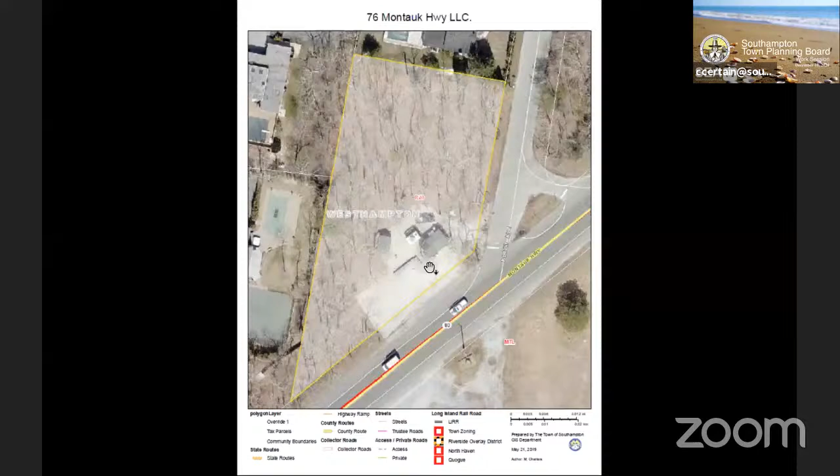This is on for completeness. It's 76 Montauk Highway. The board saw this the first time for completeness back in August on the 13th. It was deemed incomplete - basically it didn't comply with the adopted pre-submission conference report. If you can see here, it's not a great copy. I don't know what's going on with the scanner downstairs, but the applicant has revised their plans.

They're showing some angled parking here. Janice and myself had the opportunity to meet with the owner of the property and Rob Marcinsick, and they're going to do some temporary planters here to control the flow of traffic - someone will enter here and go out here, or vice versa, come around and come out, just so we can close up this curb cut a little bit. But they've submitted everything they need to.

This is the existing farm stand. It's pretty small, what they're doing in the nature of the work - just a 195 square foot expansion. It's going to match what's there, so I'm recommending this is deemed complete. We did SEQRA on this, if you recall, back in 2017, adopted a pretty hefty conditioned negative declaration which limited what was allowed on the site and the hours of operation. So I'm recommending we deem this complete.

There's been hearings for this at the ZBA and for the pre-submission. The public has never come. I don't really see the need for an additional public hearing, so I'm recommending that gets waived with a 30-day written comment period.

Can you go back to the survey for a second? Sure. Do you have encroachment - is the property going off the property line? Not that I can see. Yeah, it's right there, where your hand is. Right here, this is the property line here. Yeah, these are the curb cuts.

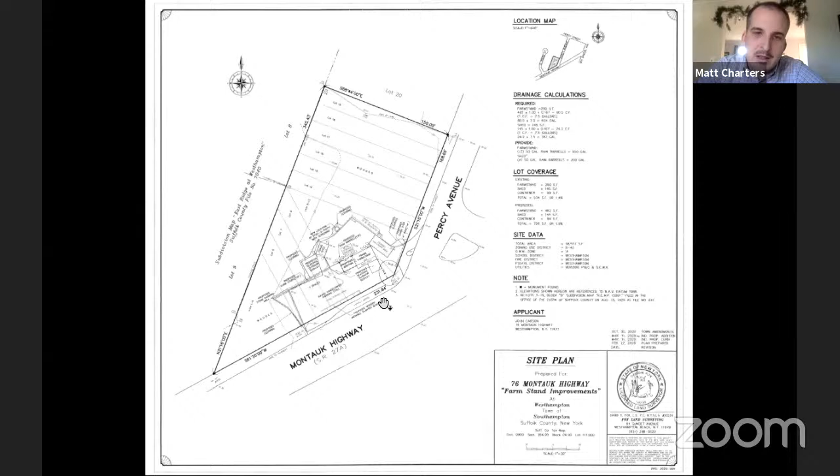They just kind of show where the curb cut is. It's within the right of way. If they need to do any additional work in the right of way, they'll obviously have to get permits. In this case, I believe it's from the state, this section of the highway. I saw the dock line for the property line and it seems to be the edge of the pavement.

The movable planters are an interesting solution.

Does Rob Marcinsick need to say anything here? You're muted, Rob. Can you tell him he's muted, Charles? He's not paying any attention to me. I think his microphone's just not working, his volume is not up. Turn your volume up.

Me and Rob had a conversation there. I think he's good, I'll translate, everything's okay, so we're going to deem it complete.

We're going to waive the public hearing and have a 30-day written comment period. Have a motion? Motion by Dennis, second by Phil. All in favor? Aye. Opposed, abstentions, 7 in favor. Thanks, Rob.

We're moving on to number 3, Hamlet of Bridgehampton, the Farrell Building, 2331 Montauk. Anthony, that's you. We did a pre-submission conference on this. This is Montauk Highway, this is the site. There was an existing structure that might have been removed. This is the proposed Farrell office building in the HO zoning district, next to the existing Farrell building. They will be utilizing the existing access and coming back here.

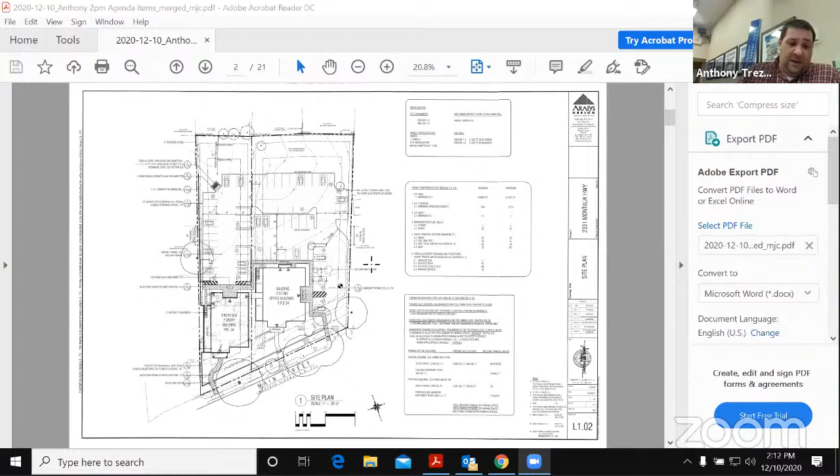The elevations are hard to read here, but they could use a little work, some more details and colors. I had also sent you the checklist, which I don't have up here. The applicant's missing a number of items, which I advised them of. The town engineer also did a review and is missing items, so I forwarded that to the applicant, and I'm recommending we deem the application incomplete until we get new maps. Is anyone here representing this?

I believe Bailey Larkin was supposed to be here. Charles, is Bailey Larkin there? I am looking. Yes. I'm sorry, I should have said that first.

Hi, Bailey Larkin with Bennett and Reed, offices at 212 Windmill Lane in Southampton. We did receive the comments from Anthony and the engineering staff, and Aries Design is working on addressing all those comments, so we had anticipated it was going to be a decision of this board that it was incomplete.

Can I have a motion to deem this incomplete? Motion by Gloria, second by Dennis. All in favor? Aye. Opposed, abstentions, 7 in favor.

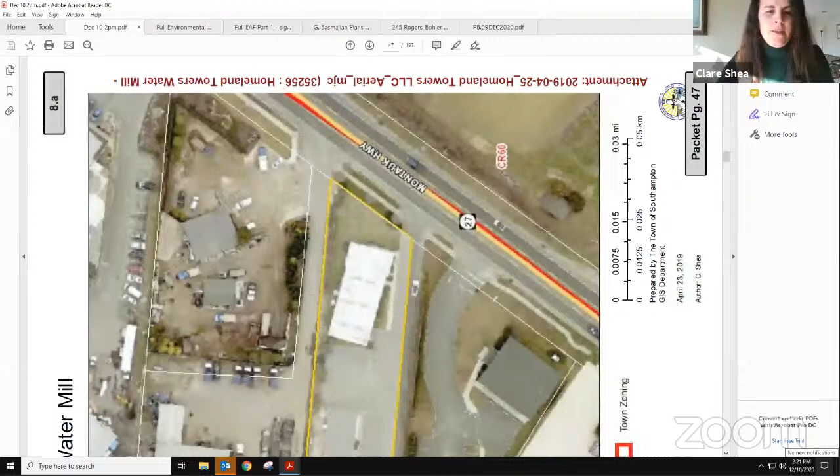So this is the cell tower in the rear of the Ethan Allen property in Water Mill. This has been subject to an application. The site plan hearing happens, there's some comments, and this is the aerial.

Since the hearing, the applicant has actually amended the application to provide an additional plan that relocated the structure back to a 100 foot setback from the neighboring property, so it meets that setback entirely in the rear. So you can see it used to be more centered here, and now it's located to meet the 100 foot from this property line. So that standard is now being met.

Can I just ask a question before we get into the report? What is the disposition, Robert, of those cars? Disposition of those cars, they either need to go or the property owner needs to make the necessary application and the board needs to approve it. And quite frankly, if we receive an approval with the condition that our building permit will be held up on those cars being on the property, then we will do what we have to do with our lease rights to apply whatever pressure we can apply.

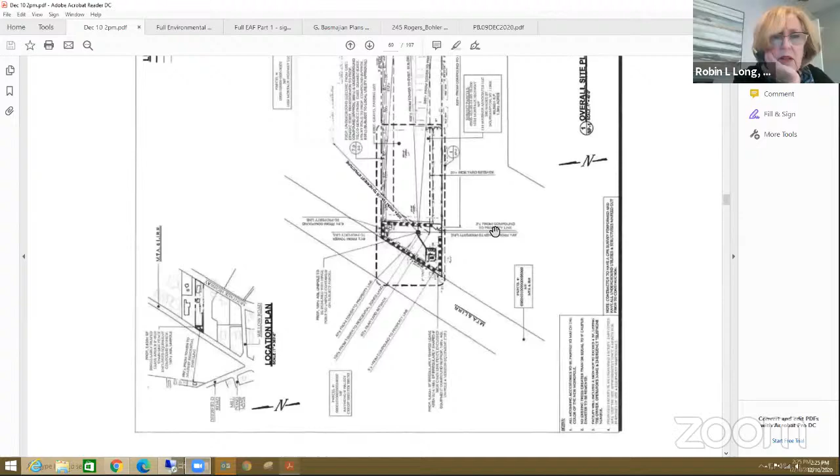Did we ever straighten out how many uses are on this property? Yeah, so this has been determined to be an accessory use. That was a determination that the building inspector has now made, and it's referenced in the report now. Accessory to which one of the other two uses? I think the contractor use on the property.

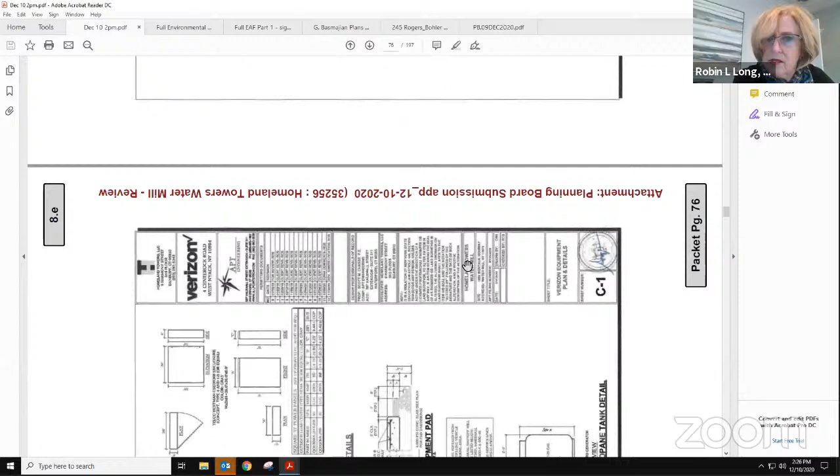Because it would be important to determine the cars, to see who is claiming that usage. Who is leaving the cars on the property - is it the contractor? No, neither, it's a car dealership elsewhere, and they're just parking there. Who's granting the permission for the car dealership elsewhere to leave the cars there?

The owner, presumably the property owner. Which is what Mr. Gaudioso is saying - once he's going to have that conversation with the property owner pursuant to his lease, and his lease is with the property owner. Okay, I need my approval from this board to have a little more leverage, quite frankly.

So there's a property owner who's renting to the two stores and possibly renting to a third party who's storing the cars. I'm just trying to understand. Correct, yeah, that's my understanding.

And your lease is with the property owner making this - does the accessory use tie to one of the two stores' lease? I'm just asking for the mechanism. To the use that's on the property, not necessarily to the lease, but I guess you could, by result of that, say the word lease, but it's based on the use.

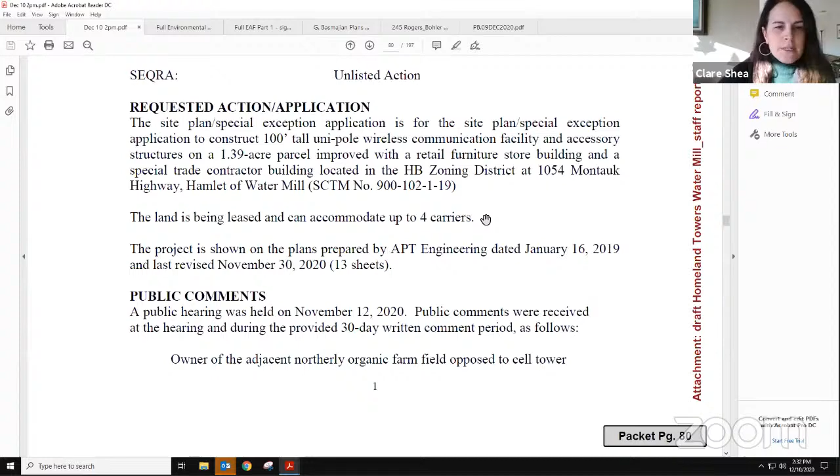It's a 100-foot tall unipole in the rear of the building, and it can accommodate up to 4 carriers. It's going to be a lease. Internal tenants, yeah, exactly.

Public hearing November 12th, 30-day written comment period. During the hearing there were some comments. The owner of the adjacent northerly organic farm is opposed to the cell tower. The organic farm field is zoned residential and they wish to build a house there in the future.

CAC concerns are cited in the 2019 letter. The 85 to 100-foot monopole cannot be incorporated into the streetscape and is highly visible. Additional carriers will require the 100-foot height. The data survey is flawed; the use is industrial.

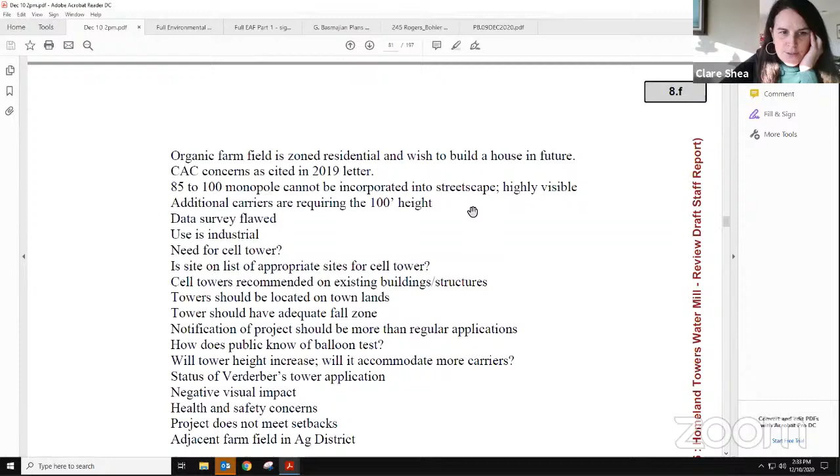Is there a need for a cell tower? Is the site on the list of appropriate sites for cell towers? Cell towers are recommended on existing buildings and structures. Towers should be located on town lands. Towers should have an adequate fall zone. Notification of projects should be more than for regular applications.

How does the public know of the balloon test? Will the tower height increase? Will it accommodate more carriers? What is the status of the Verderber's tower application? There's negative visual impact, health and safety concerns. The project does not meet setbacks, and there's an adjacent farm field in the ag district.

The applicant provided a response that I forwarded to you, I think mid last week, so I just wanted to make sure you had that. The project is classified as an unlisted action, and the board issued a negative declaration on October 8th.

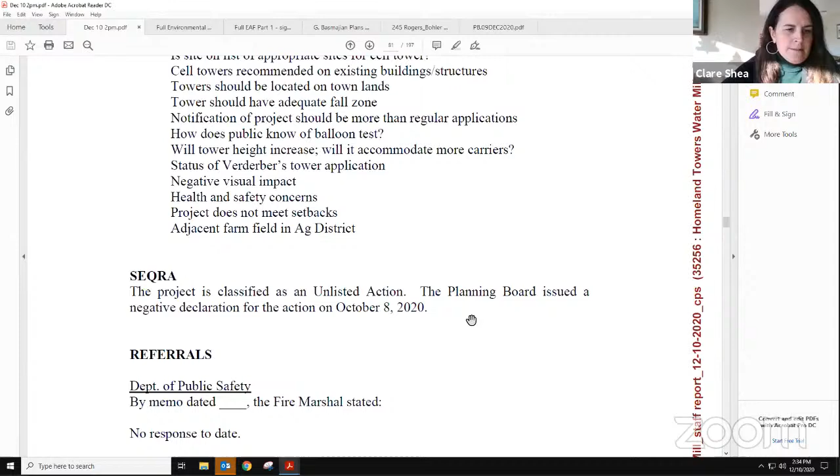The fire marshal comments - I'll add these in, I just got them a couple minutes ago, so I'll put them in there. Southampton Fire District had no response.

And here's the CAC comment, I'll read it into the record. The Watermill CAC presented a number of questions and concerns regarding this proposal during the pre-submission conference. While we appreciate the applicant's attempt to address the issues we raised, the same problems exist. Therefore, the CAC would like to submit our letter from June 2019, and we'd like to make a few additional comments for the record.

While the height of the tower has been reduced, it still doesn't meet the setback requirements for this type of application. During the pre-submission conference, the applicant posited that the board should grant them relief since the fall zone was adjacent to an open farm field. They continue to make this argument. This farm field is located in an agricultural overlay district, which is an area to be avoided according to the town's wireless communication plan.

It is organically farmed by the Halsey family and is also zoned residential. At some point in time, the property owner may decide they want to build a house for their children or grandchildren, and perhaps they may want to or need to sell the property. The installation of a giant cell tower will basically render this property worthless.

No one in this community would ever willingly buy a house, build a house, or raise their family under the shadow of a cell tower. It is also rather disingenuous for the applicant to say that granting them relief from the setback requirements would be vindicated by the fact that the land was never developed residentially, as if the setback requirements for the homeowner would somehow make up the difference.

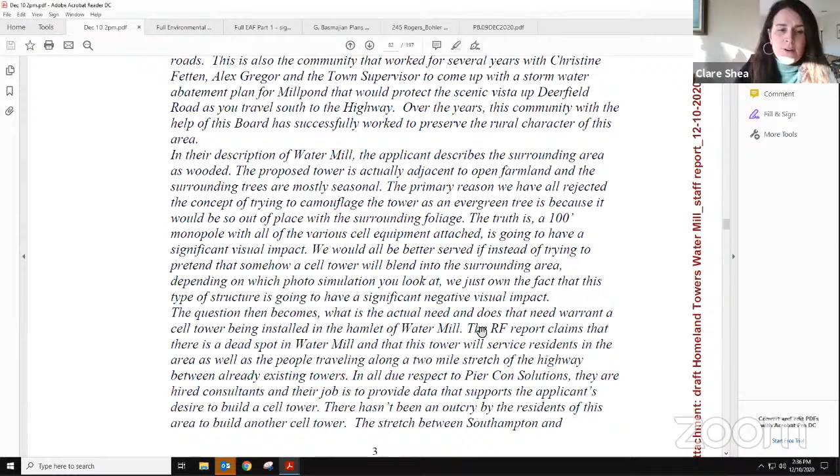The truth is, a 100-foot monopole with all the various cell equipment attached is going to have a significant visual impact. We would all be better served if, instead of trying to pretend that somehow our cell tower would blend into the surrounding areas, depending on which photo simulation we look at, we just own the fact that this type of structure is going to have a significant negative visual impact.

The question then becomes, what is the actual need, and does it warrant a cell tower being installed in the hamlet of Water Mill? The RF report claims there's a dead spot in Water Mill, and the tower will service residents in the area as well as people traveling along the 2-mile stretch of highway between already existing towers. With all due respect, Pier Con Solutions hired consultants, and their job is to provide data that supports the applicant's desire to build a cell tower.

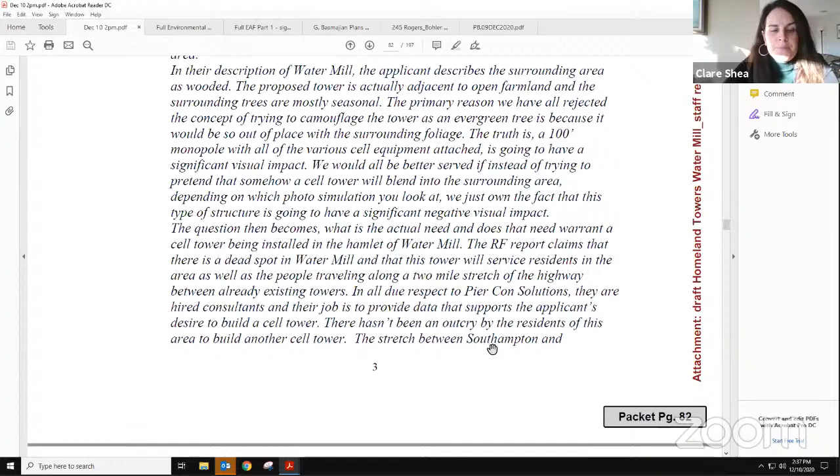There hasn't been an outcry by residents in the area to build another cell tower. The stretch between Southampton and Bridgehampton is not an area known for dropped cell phone calls. All of us who live here know the area well enough to confirm that while there are definitely a list of dead zones in our community, they certainly don't include this section of Watermill.

Page 23 of the report, the applicant concludes that there will be no significant effects from this project. However, without a proven need, combined with the fact that this proposal does not meet the basic setback requirements, and there will be a proven negative effect on adjacent property values, the Watermill CAC respectfully asks the board to consider our comments and deny this application.

Southampton Town Engineer, as of October 20th, had statements regarding the trench detail and the pre-construction meeting, and recommended approval. The Suffolk County Department of Economic Development and Planning said it was a local determination.

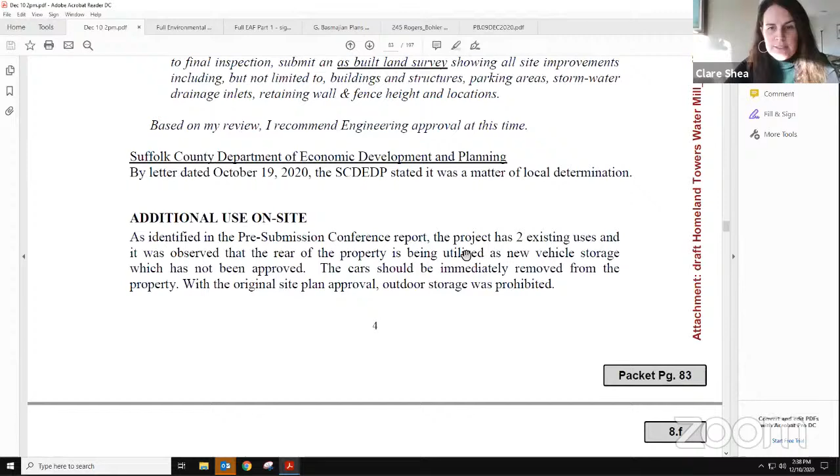And this is my language about the additional uses on the site. There'll be a condition that they be removed prior to signature of the plans. So I'll have that language in the decision if the board's comfortable with that. And then here's the language regarding the use, and then I'll reference Dennis's exact memo up above.

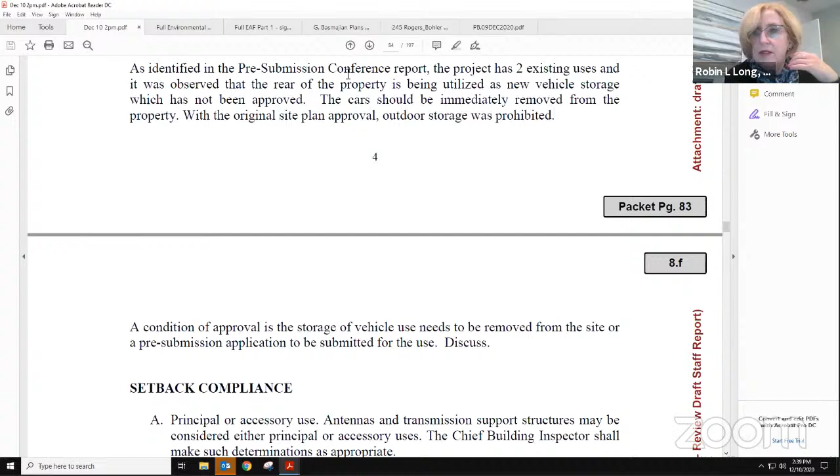Clare, can I just back up to that verbiage on the cars? Is there any other debris or trucks, or anything else that they have on that site besides the vehicles in that area? Do you want to look at the aerial? Because they're being very specific that storage of vehicle use needs to be removed, the vehicles need to be removed. I'm just concerned that when we get very specific, we've covered everything. I don't know what else kind of junk they've got there, and it might help the applicant also.

Is there anything else there that needs to be removed too? It looks like some of the vehicles are larger than cars, so maybe we need to say vehicles. Matthew, did you see anything there? Yes, is it truck containers?

The other uses, where Clare's cursor is now, I believe those are vehicles associated with the special trade contractor use that's permitted there. Have we formalized that parking back there for the special trade contractor? There's a site plan for that. It was related to when Ethan Allen came in, so we reviewed the entire site at that time. So there's a site plan that allowed them to have this associated with their contractor use. But yeah, we can be very specific, Robin.

I'm looking at the verbiage and I'm a little concerned that people who don't really want to follow the law will look at that verbiage and give us a hard time. We want that all cleared out, and I think the applicant wants it all cleared out also. So whether it's being used for storage or whatever, any vehicles back there that aren't the contractor's and aren't legal parking shouldn't be there. We can say any vehicles not associated with the permitted uses on the parcel.

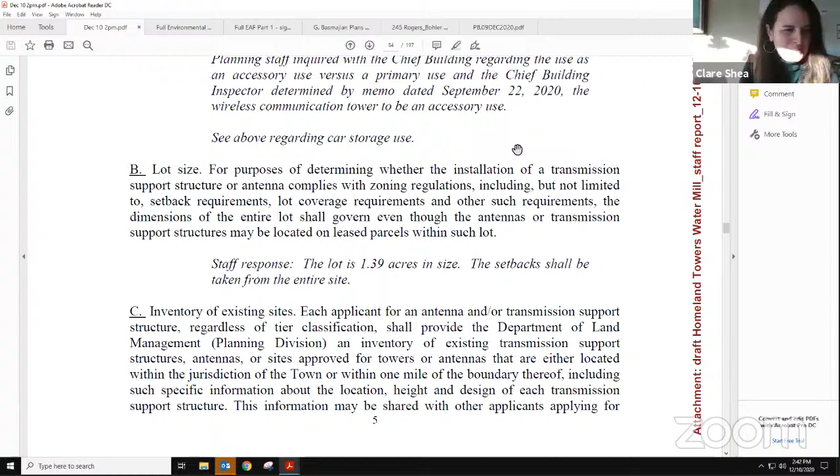Okay, I'm just going to go through the standards real quick, and I'll skip anything you want, since there are a lot of pages to this. So the lot size meets the requirements. They provided the inventory, building permit required, had to follow the building code, signage requirements.

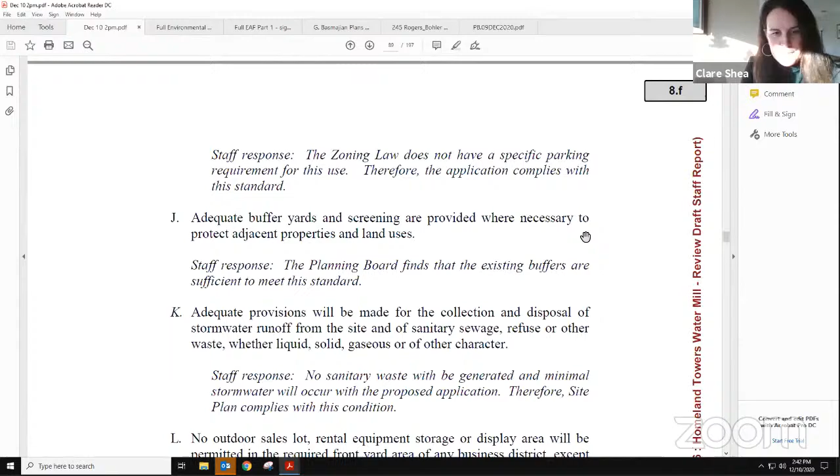And then here's the special exception criteria. These are the general ones, I'm just going to skip these. It's more appropriate to have the specific ones that have the setbacks and such. So here they are.

There's a pre-submission conference process. This is the standards for the 100-foot tower proposed. They are, pursuant to current federal regulations, eligible for 2 10-foot extensions. The applicant—

There's no proposal to extend it at this time. But that's based on approval by the planning board, right? No, at that point—as of right? I mean, I don't think it's as of right. I think it is, but they would come to us, but it'd have to be granted at the end of the day. It has to meet certain conditions, though.

Yes, there's a lot of standards that have to be met, but I think we should put what federal regulation it is, if it has a number. It would be—I can cite it. Yeah, I just wanted it in here. It's just kind of standard. I've been carrying this over, so everybody's aware of it.

Didn't we have that where somebody did 120 and we didn't know how it got from 100 to 120, but they were allowed to go up? I think that was 120. Yeah, that was the one in the LI-40 zone, in Eastport. That's why I like that language, so that we're all on notice about that. Exactly, they came back and got your approval for it. It's just, unfortunately, part of the federal regulations for it.

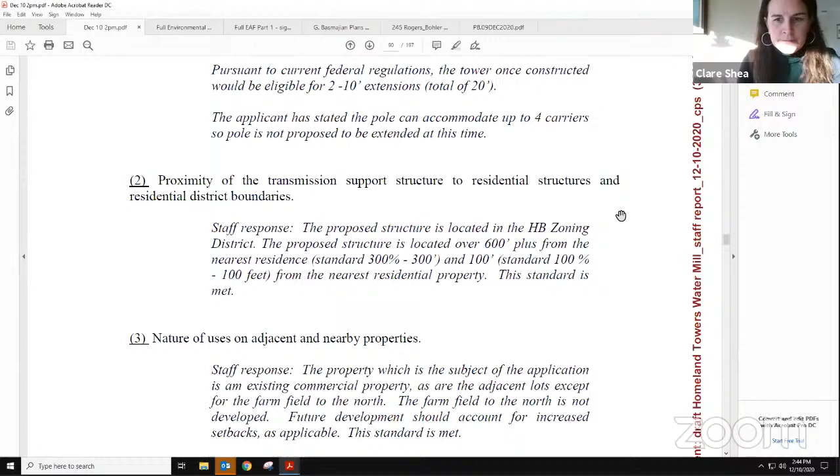So this is the setback. This is 100% from the nearest—this is 300% from the nearest residence, and it's over 600 feet. So it meets the standard for this.

And so that's the change that the CAC was in opposition to. Actually, no, this has always been conformance—they have always been more than 600 feet from the nearest residence. There's a bunch of standards here to be met. What's been changed is with the fall zone. What the CAC did not like was that the fall zone is 100% from a residential property, which is coming up. So they moved it to accommodate the fall zone. Yes, they have.

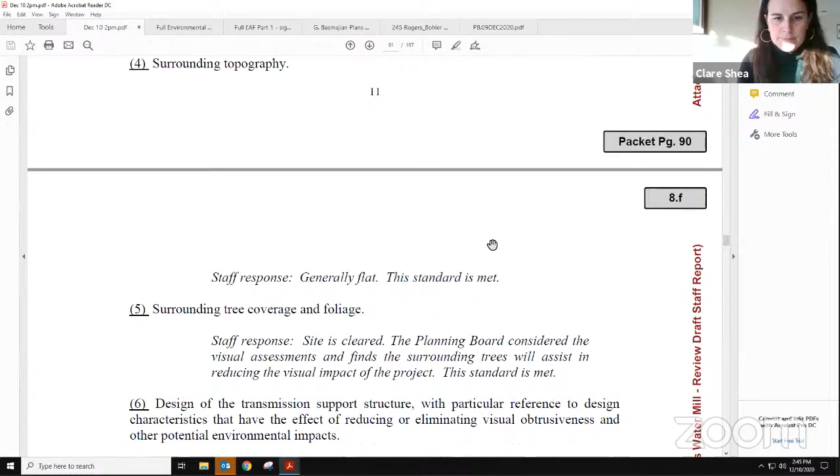Okay, generally flat, so the surrounding tree coverage—you had reviewed this as part of the visual impact under SEQRA. The color will be gray, silver, or blue, and that'll meet that. Egress, ingress will not change. We had reviewed the alternative transmission structures existing. Standard is met.

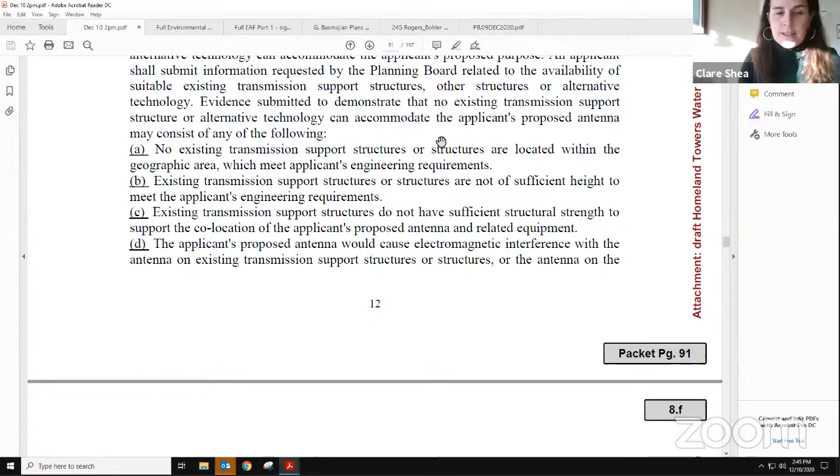This is related to the need for the alternative for the technology. That was the RF report that was submitted and you reviewed at time of SEQRA.

This is the visual compatibility. Again, this is about the gray color for the structure, so it blends as much as possible. Site design—this is the FAA. The standard is met. Landscaping.

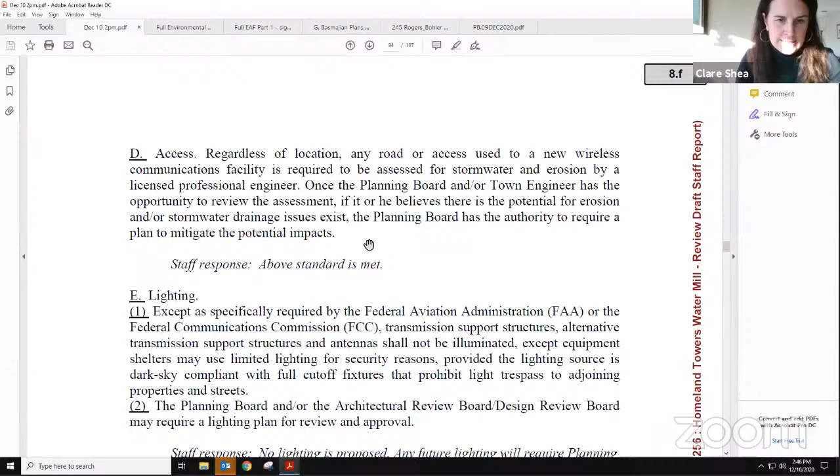Talk about this—the applicant has proposed, and I can show you that on the site plan, a series of evergreens, arborvitaes around the perimeter of the property, which will help screen the equipment and the fencing, and arborvitaes grow large. So there'll be a landscape bond related to this. This is the fencing requirement, and they'll have to meet that. Access is existing, so it'll be met. There's no lighting proposed that I know of, but any future lighting will be subject to planning board review.

Signage—may I stop you for just a second on the landscaping? Sure. It would be around the fence that's going to encompass the equipment, not around the total parcel, which has other uses.

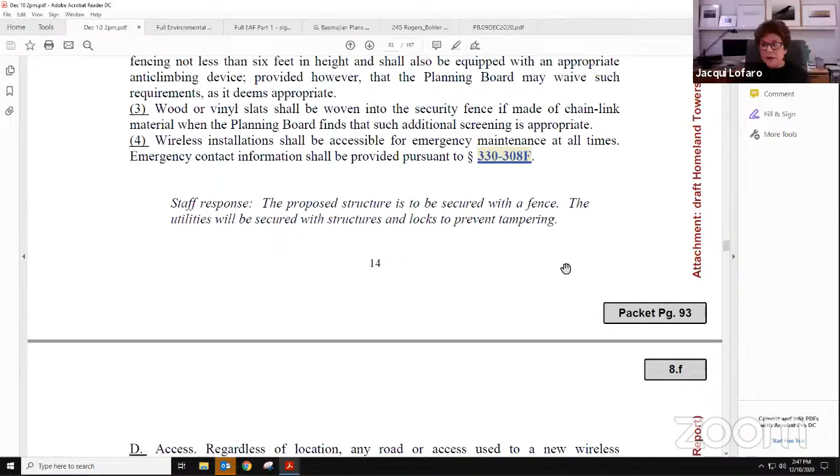It's only around the leased area, yes. Do you have a landscape plan to show? Yeah, I have to go back to the plan, I have to jump around here. Finish your report first and then we'll go back to the plan, Clare. Okay, we'll do that.

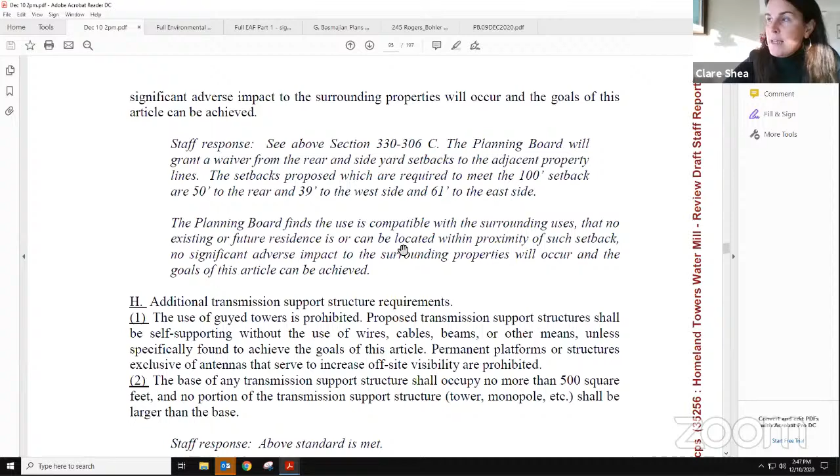Access, lighting, signage, setbacks. Here we go. So there are two standards: the 100-foot setback to the rear to the residential properties is being met. The other setbacks, from the property lines, are variances you are granting due to the fact that the properties to the east and west are commercial in nature, so you've granted relief from the 100% setback.

These are the setbacks to the single family residence. That's 300%, that's at 600. And this is the vacant unplatted residential, so you can see it's 100 feet or 100%, which is the 100-foot that's being met now from their property. And this is the equipment base. This is all consistent, and that's the end.

So I'll go back to the plan. I think it's at 69.

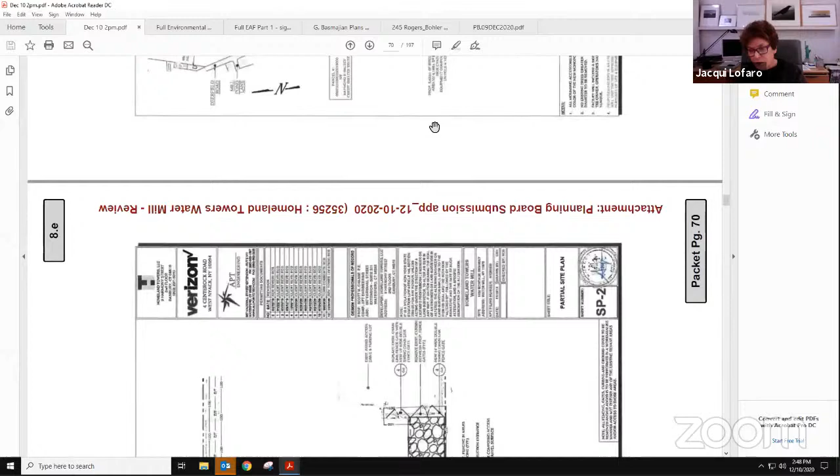So Robert, with this tower, you've got 2 miles from Watermill, then it goes to the Bridgehampton cell tower, and the Bridgehampton cell tower picks up and goes forward from there. I think one of these days what we'd like to see is an overall master wireless plan.

Maybe that has to come out of the planning department to see where gaps are now. I agree. If you look at the report PeerCon did, we didn't do the whole town, but we did this whole area, even heading up to Sag Harbor, and that would be a really good start. A lot of the maps in the master plan now are from prior technologies and prior usages. After COVID the usage has changed so significantly on the East End that the coverage is different. I think the first presentation we heard today about the while-you-wait technology, the fact that we're doing these meetings on Zoom...

I just think going forward, things are going to be different, and in some ways for the better, but that impacts the need for wireless service. I know you asked the question before about the service in the parking lot. We'd be happy to meet with staff and show them what we have, and irrespective of this application, we'd be happy to be cooperative like that and try to provide some data.

Thank you, because that would be good for everybody. Yeah, that would help everybody. We need, just the way we do for trails, to do this with the cell towers and see where coverage is. It evolves, but there's nothing wrong with having the current data and understanding the current situation and where you expect it to go. That's smart planning, quite frankly. I agree, and we have the information, it's just different applications, so it's a matter of putting it together.

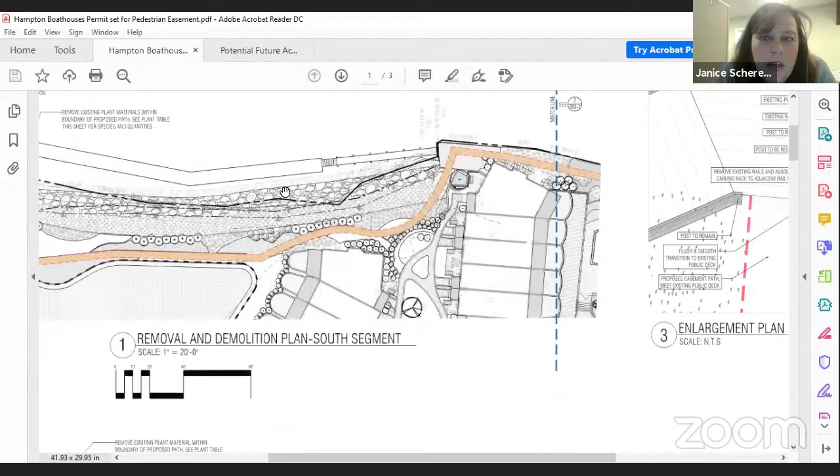Unfortunately, the way the easement is written and agreed was a springing easement predicated on getting the other side for public access. So this shows how it would be connected. Kristen also gave us a short video, about five minutes, of walking that path, which might be useful to see.

Oh wait, okay, can you see this? No. So that's the fishing pier component. I'm not seeing it, we don't see it. It's not up yet, Janice. Hold on, that's weird, what's going on, Mike? I gotta see that. What are they seeing? Okay, can you see that now? Yep, let me start over.

Sorry, so this starts at the fishing pier overlook, closer to Montauk Highway, just to orient you. I'll push play. So this part of the construction has been completed, related to the parking lot, and someone can access this and fish into the canal.

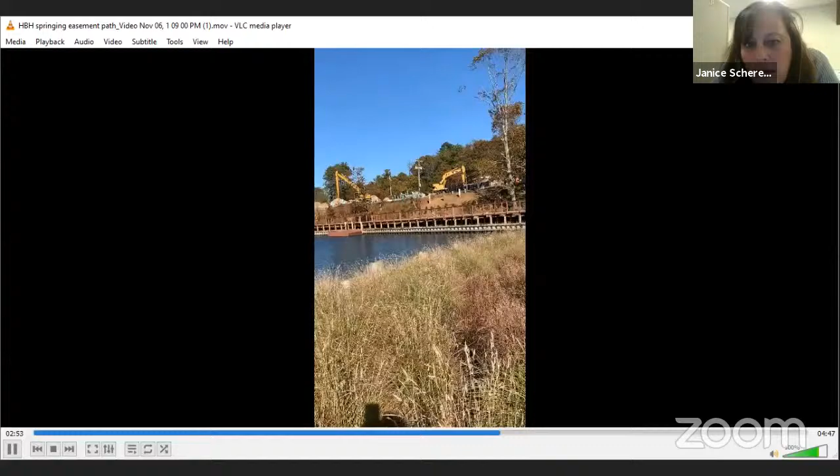And like you said, adding a railing at the bulkhead. Seems like a minor detail, but could we throw a life preserver ring on the rail maybe? Well, when I was there doing an inspection, I was concerned about this lower bulkhead part because it's all vegetated and looked difficult to navigate. Above that is the pool area, right there to the right.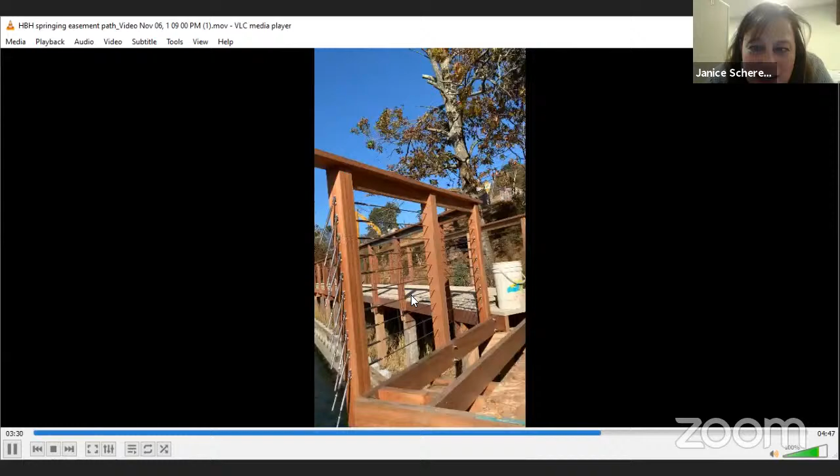And then they would go up, this is that new dock you had. It was a floating dock, and John Zuccarelli was very worried someone might fall, so they redid it and the height, remember. I think that came out really well, actually. The whole thing would be such a wonderful community benefit when it's finished, if we can get this done.

And how much parking access is there? There are 5 parking spots, end right? So this was just what you saw, that existing deck, walking along this path all the way around the pool area. So it was that path you just saw her walking on. And do you find that this plan shows that in enough detail, and then you can approve this plan, is really the question. Janice, my usual question that comes up at this point, the MTA hookup, where is that?

There's been no activity on the part of the applicant to secure any easements from anyone. And we've tried multiple times and have not been successful.

Wasn't this part of this, that there would be the hookup for it to go right into the other park? Yes, through the MTA property. I'm sorry, Robin, can you repeat that? I'm sorry, the MTA property.

So it's a springing easement, in that it's not a public access easement until there's somewhere to get to. But they're sort of not building it yet either, apparently. Well, they've agreed to do some mulch path here, at this point.

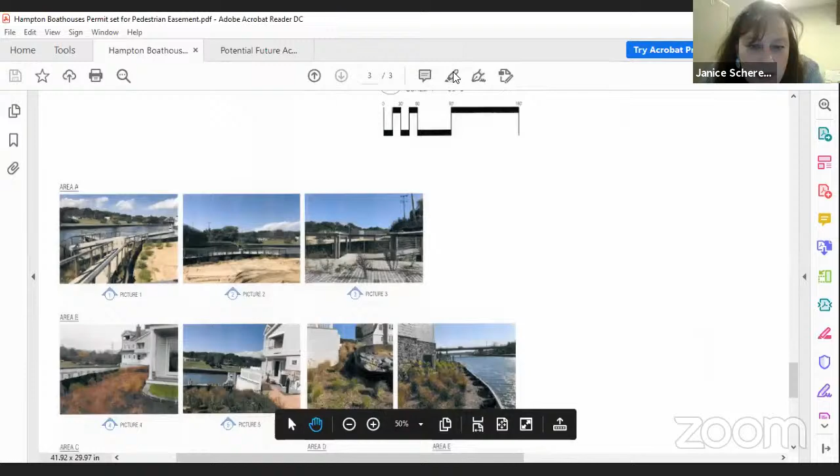The easement language, if I can go to that, actually, hang on a second. Sorry, just give me a second. Or not, I guess I don't have that. The easement language indicates that it may be that the municipality would, do you see this now? I'm sorry. Am I? Right. Having technical problems here.

Screen, share screen. It's 2020. We're having problems. Here it is. Okay, here we go. Seeing this?

Yep. So number 1, they shall construct and create a public access path. Grantee may construct the path in the event that same has not been constructed by grantor after notice and reasonable time, meaning the town would be responsible.

I just want to make sure that we don't need a performance bond, is my basic point. Well, if the town constructs it, wouldn't the cost be assessed back to the HOA at that point?

Well, it would be great to get this done before an HOA is established. It would be transferred to the HOA. I mean, it doesn't say that.

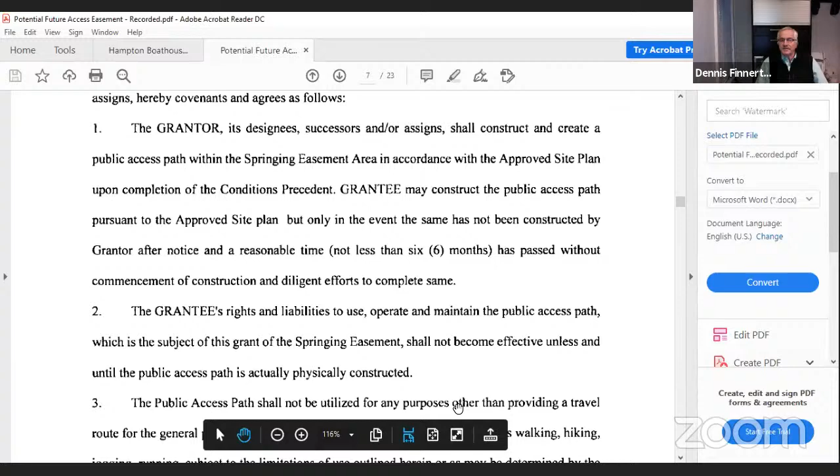We should have some sort of document, Janice, that details the scope of work, the path. Just something to formalize it, so all parties are in agreement of what would be constructed. And then, if the grantor does not construct it, I would say the municipality would construct it and the cost be assessed back to the HOA, or back to the grantor. Is that contained in the agreement or the local law?

No, it just provides for the fact that the public access is important. So my basic point is just that we're happy. I think that the plan captures what we want.

You're right, Dennis, I agree with you that we do need a little more closer scope of work and understand the cost associated, and just basically, do we need some kind of instrument such as a performance bond, or are we just going to assess that back to an HOA if it falls on us to construct it?

I just want to lay it all out there so we're all understanding what's happening here, which is it doesn't look like it's being constructed now. It may be this mulch path, but the rest of it is not. It's certainly not available to the public, even though it could be made available to the people who live there if it were constructed now.

But as far as I can tell, it's not being proposed to be constructed anytime soon. So there was no start date indicated here and finish date?

Well, the start date is when the owner receives notice that the town has achieved access to the site on either end. And that's contained in the, right, so that's the start date. So at one end it's completed and at the other end it's completed, right? So it's the middle pathway that has to be completed.

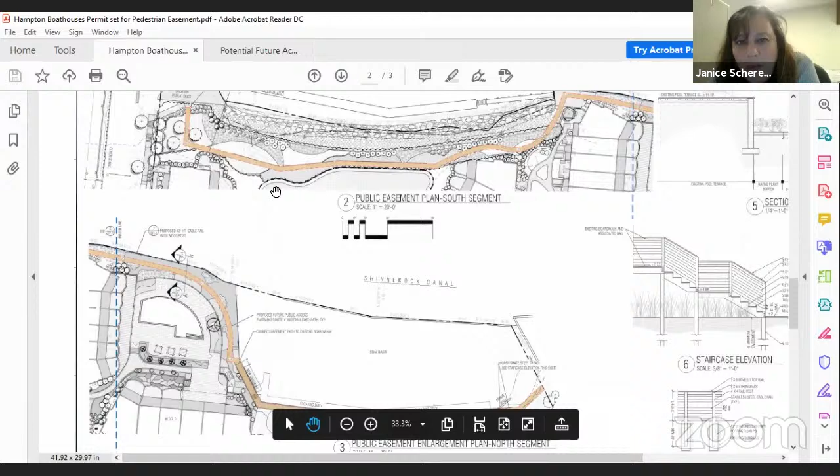Well, first you have to complete the ends, the north end and the south end. Once we get notice of that, they have the obligation to complete. What is the definition of completion pursuant to the site plan? Well, this would be the plan that you approve that equals complete.

So the question is, is any document, form and substance of that site plan acceptable to the board in terms of what you're getting if and when it does happen? Isn't the question when it happens? Don't we want this to proceed?

We would have to get notice that access has been granted on the north side from the MTA and the south side from Suffolk County, and then these improvements or modifications would be made. That's when this starts. And then this plan identifies the materials, the improvements, the modifications, the changes that would need to be made.

So that's clear, but can I ask you, have you proceeded with securing the MTA agreement and the Suffolk County agreement? There have been conversations, and what we've been told is that they are not okay granting public access underneath the Montauk Highway overpass bridge. But yes, we have done what we're able to facilitate those conversations.

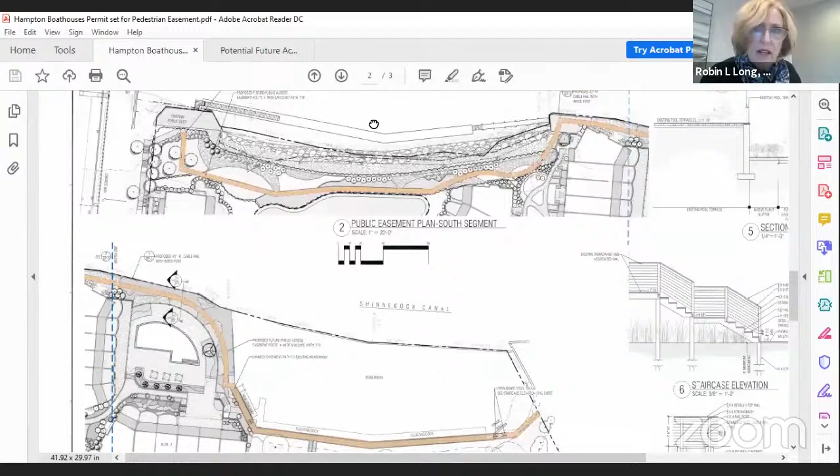Are you saying they're not going to grant it, the MTA or the county? The county for the south side underneath the bridge, and the MTA to the north of our site. So this will never get built?

It's not that, that's the highest town board condition that the board imposed on the approval of the change of zone. This is a community benefit that will never exist unless— translation, Robin, the town cut a bad deal. No, wait, Dennis, that's not fair. It is. The town requested it in order to connect a walkway along the east side of the canal.

But if there's no connection for the walkway coming from the north to the south, then this doesn't really serve a purpose. It would serve a wonderful community amenity. People oftentimes take walks up trails and then turn around and walk back. Well, that wasn't what was agreed to with the town board at the time.

Well, hence my comment about a bad deal. I mean, that's what they asked for, that's what they got. Well, let's try to go step by step. Whose responsibility is it to secure approval from Suffolk County and from the MTA? Is it yours, the applicant, or the town?

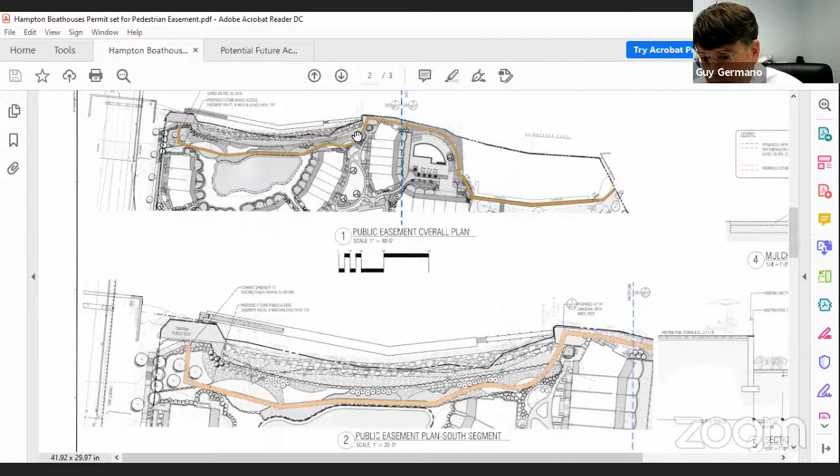There's plenty of properties where the grass goes right up to the bulkhead all the time, directly across the canal at that county park - there's no fence along the bulkhead. It's pretty typical that bulkheads aren't fenced in. The only time I've seen them fenced in is when a family has little children. I think the only thing that would trigger fencing would be public access - if you have public access, you have to have some kind of safety railing.

Right, so let's just talk about this first half. Would you be able to execute that portion of the trail, the mulch path, now? No, you'd have to take it out and do it during construction - it would all be ripped up.

Nothing is under construction right now, you saw it was just like a dirt pile. There would be no talk about safety - it wouldn't be safe for anyone to be walking south of building 3, right in the middle of an active construction site.

Can I just rewind for a second? The obligation to put in any of this path - am I correct - springs from getting permission from the county on one side and the MTA on the other side? Correct. So that path is not obligated without those two conditions being met. Is that correct? Yes.

So that means right now you're within your rights - and I'm not quite sure who was obligated to do this, because I've been asking this, Janice, I've been a broken record on this - who's responsible for getting that? So really this path will never exist. It'll exist on paper. There could be an obligation to put mulch and fencing and whatever you want, but the obligation to make that exist will never arise until there is both ends connected, or just one?

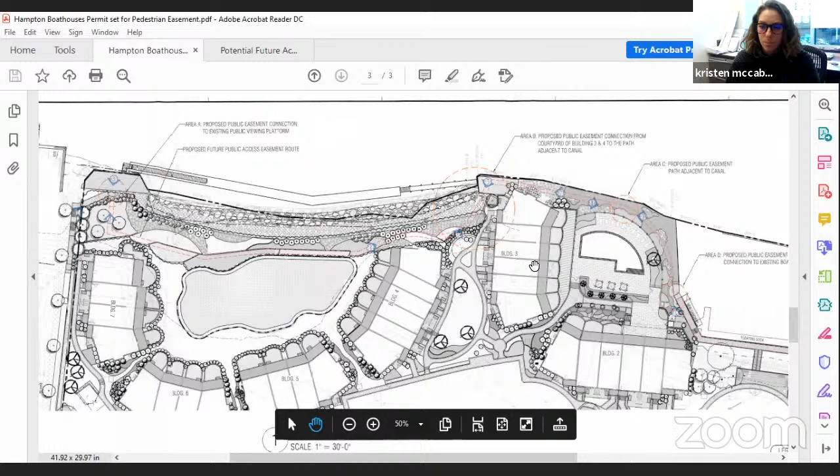Refer back to my prior comment, Robin. I won't repeat it. Dennis, we took a very strong position that this application essentially took away from the community water access. It was a very popular area before this development. So it was very integral into the approval process, this public access walkway. And here we are saying that if Robin is correct and Dennis is correct, it may never happen.

So it's a conundrum. How do we move forward with it? How do we clarify it? What only can we hope to do? Jacqui, at some point the applicants may come back to the town seeking to do a modification on either of the two sites. And at that point, the town would have leverage to say, let's put this trail in.

That goes to my point. We should have some document memorializing what we're going to do, the fencing. At least there'll be a document on hand. But I don't think we're in a position, Janice, to take a bond, because it would be really cumbersome. There would be an obligation date, it would have to be renewed. I think the PDD language speaks for itself. And we have the right, Kathleen, unless she feels otherwise, the municipality, if they didn't perform, could step in and undertake that work.

So in addition to that plan, are you satisfied at least that the plan is clear enough and we can ask the applicant to give us the scope of work? No, it's not clear enough. I mean, there's a pathway marked on the map, but it should be clearly marked, the first 200 feet are mulch, no handrails, the second 100 feet are XYZ with rails and platforms. It should be mapped out exactly like it's going to be built.

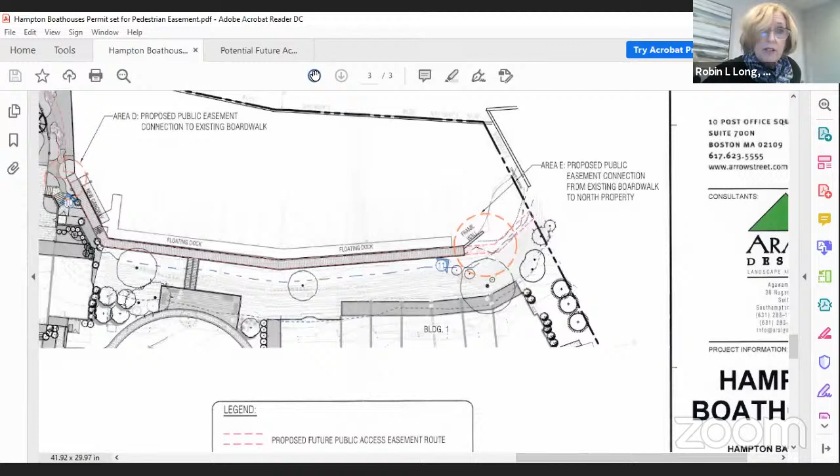I'd also like to check, I'm very concerned about people with disabilities. I was looking at one section that was on a slant or incline as you were walking. Are we saying that anybody from the public who is disabled is never going to be able to use this path? Do we have any obligation to make it ADA accessible? Robin, many of the trails on CPF land are certainly not handicapped accessible, and if you don't know what you're doing you could get hurt. That's town property. I'm asking, does the law require anything for us in doing this to make sure it's accessible to someone with disabilities?

The PDD law doesn't address it. I would say that the viewing platform is handicap accessible. Would you agree with that, Kristen? There are stairs down to it, so... yeah, there are stairs. Typically, handicap accessible trails are not required because it's almost impossible when you have topography to make them handicap accessible, and that's what you have here.

How about the viewing, the fishing area where the steps are? Is there a way of putting a ramp there so at least someone can fish who is in a wheelchair? I think the change in grade prevents that from happening. A ramp?

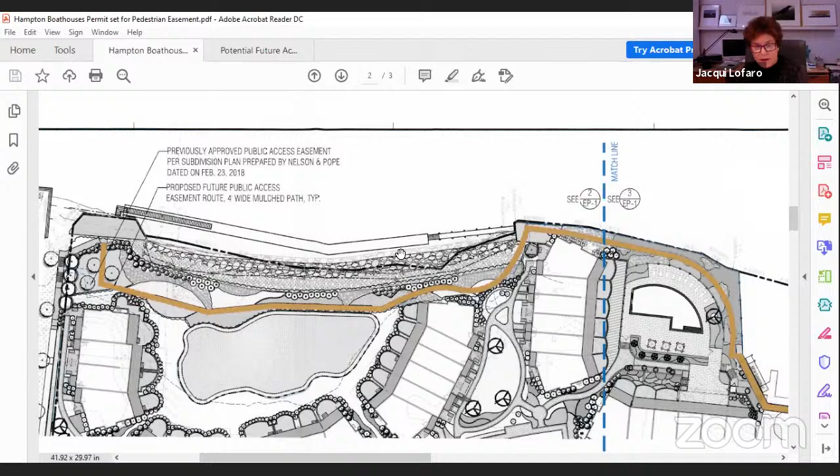Well, before we go on endlessly with this, we need the path extracted as a separate document, very clearly delineating what the materials are going to be, how many feet are mulch, how many feet are decked, where the rails go, so we know what we're dealing with.

Yeah, I would say this plan is fairly accurate. It's just you want to know how many linear feet of each thing there is. We should have a trail plan, Janice, a trail plan. Something, a document, if it had to go out for a bid, you could just give it to a contractor and say, here, give us a bid on this work. Exactly, Janice, I thought this was fairly detailed.

Janice, is it possible to add Steve Narota? Charles, can you ask Steve to let him in?

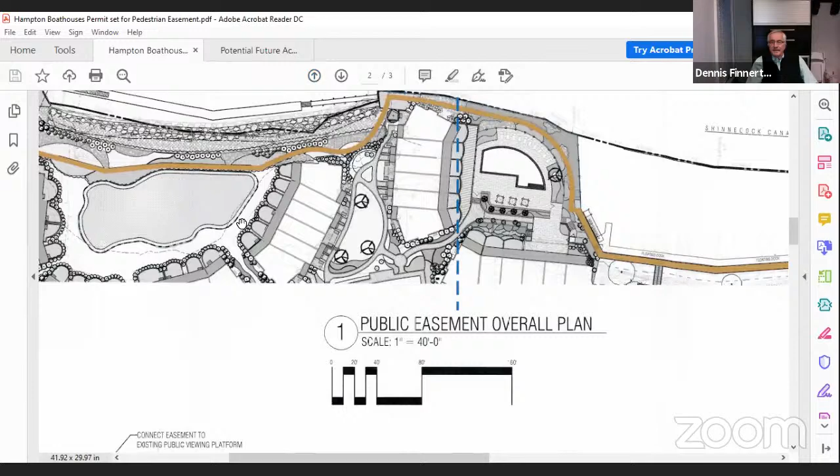Narota, and ultimately the town engineer, it would really have to be to their satisfaction, because they'd be the one contracting the work ultimately. So they should weigh in and say, I need this, and this additional, or this is sufficient, don't you think? Sure, I can absolutely refer to them if you want. Yeah, tell them this might land on their desk at some point, or their successor's.

I understand your frustration and ultimate disappointment, but we're holding on, we're not allowing COs to go further until we make sure this is all in place. So I want to make sure we know what we're doing, and so the next time you have this plan in front of you, you're satisfied.

So in addition to this particular plan, I will have a spec sheet specifying how many linear feet of mulch at 4 feet wide, how much railing is needed, all the kind of details that would be spec'd out in a scope of work, and color code it as it goes along. A biddable document.

John, who's taking ownership of contacting the county and contacting the MTA? Well, in my previous position, I asked the MTA, I sent them documents they've not responded to. I absolutely requested, and I even asked Greg Reckler himself, he does have influence with the MTA, people that, yes, and he said he would see about that, but I never heard really.

Robin, you know who has influence with those two agencies? Elected officials. Every time the election comes around, you have state officials that run for office and county officials that run for office. You have to go to the debate nights and say, hey, we've got this wonderful amenity, what can you do to facilitate this and secure the approval?

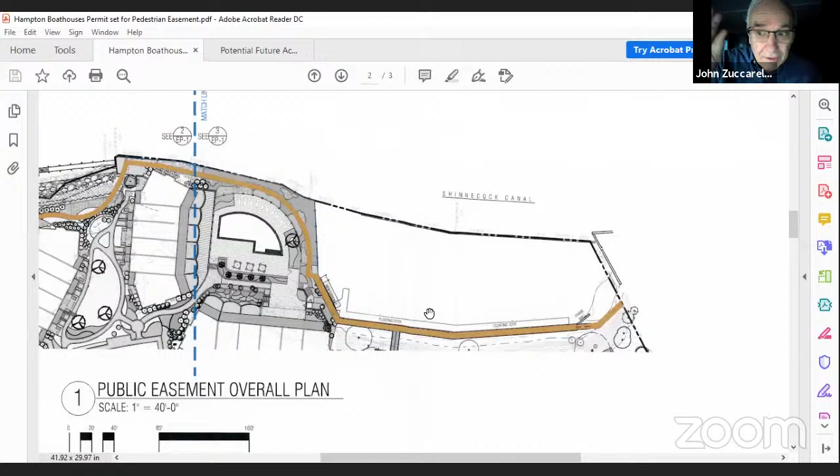I'll work with Kristen to get the specs for the actual plan if it needed to be bid out. Can I weigh in on that? I want to get this plan to a point where it's attached to the easement document as a legal reference, signed by the planning board, that this is the plan. The other plan was just too small to really count on. So really the whole goal is to just get a plan that we all know is the plan for the path. Right, so you're zoomed in to the path, basically the map of the location of that path.

But this is a 3-sheet plan that does have details that we feel would be able to come back with a cost for the bid. And Steve is on, he is the architect of the plan. If you guys have any specific questions—but to your point about tweaking the plan, there are specs on here.

I'm satisfied if Janice is satisfied. If she doesn't think we have enough specificity, she's got the plan.

And my suggestion is go to the engineer. I agree with that too. Right, and on a separate document.

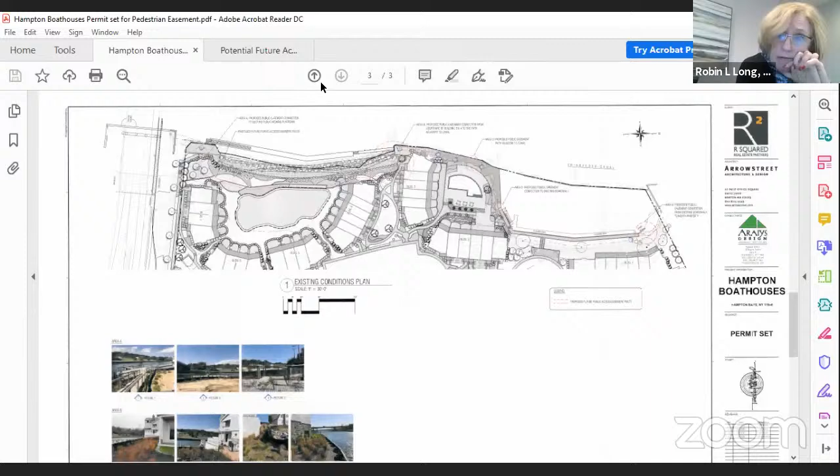Wait, John Zuccarelli would like to be heard. John, are you trying to say something? Every time I go to say something, I get over talked. Can't hear you, John. Oh, okay, I'll get closer.

My point is with the MTA and the railroad, I know what's on the other side. There is no access because you have the locks and the building. And if you try to go in, it's a public road there, so you're not continuing a path.

I think between the north side of the railroad and where the lock property starts is maybe 50, 70 feet, so you're not going to go anywhere with the path. It's not the visualization that you're going to connect to the trail or the walkway, and the landscaping on the north side of the canal is not going to be done.

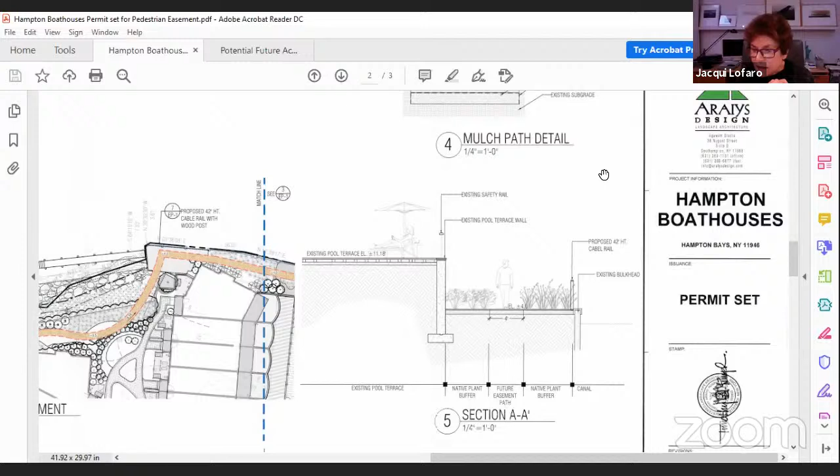So you can fight the MTA to go under there, but once you go under there, you stop. So maybe it's not necessary to get the MTA approval, right? I mean, it's a fight that leads nowhere.

Yeah, you look at it from the water view, John. So you have an interesting perspective. Yeah, well, right, you could do that. You'll get another what, maybe 100 feet, 150 feet underneath the railroad.

I think if we can get it, take it. But it's not going to give us a trail going up all the way to the Peconic. It's not going to do it.

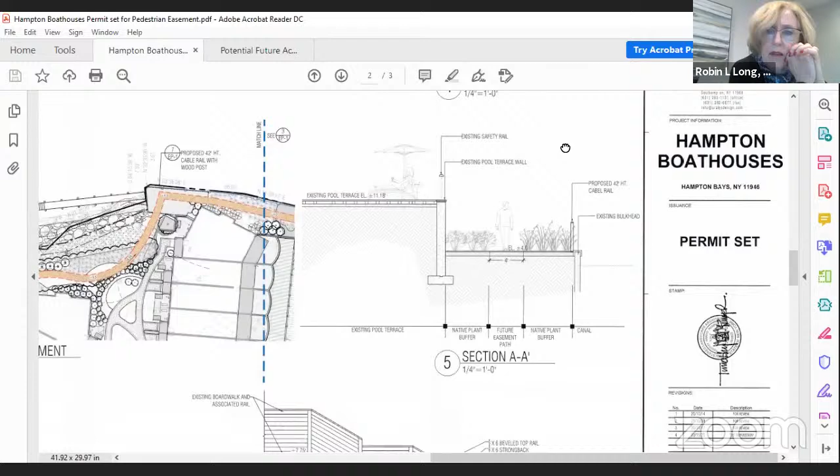Do we have to amend? I'm not sure what occurs on the south side either. Well, once we secure, I think it's the triggering mechanism is securing that approval. So once that approval is secured, we've got the legal mechanism to go in and get that.

Or, Dennis, maybe we don't need the approval if what Zuccarelli is saying is right, that there really isn't a logical connection between there. Applicants are going to hold us to the PDD law. This was legislated by the town board. You have to end up on a public road, and there's housing. The idea was to connect and then get to that part where there's benches and stuff leading up to Mashut.

Yeah, so I don't want to go on and on because I know you have a lot else, other things to discuss, but I just want to point out, yes, these are some details on the plan, but we can get some cost estimates so everybody knows, at least roughly, what this would cost.

Okay, good. Can we have our landscape consultant talk to this? Well, first, before you do that, I mean, I've completely lost track of what we're trying to accomplish today. So we're what, trying to approve the pedestrian path plan because of the fact that all of the COs are predicated on access easement also.

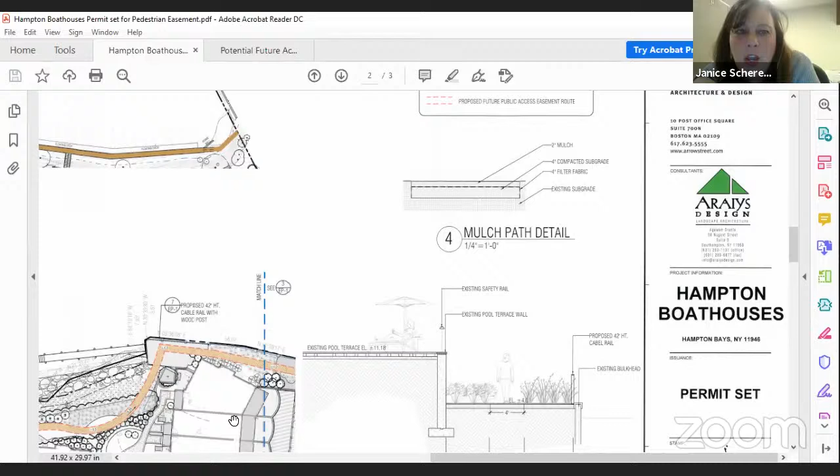So the easement, it's a springing easement, but your conditional approval said we want to see all the connections and we want a plan. So here's the plan. So I'm showing you that plan to get it approved. Because it wasn't clear in the originals, it was a condition of approval to come back with a more closely articulated plan of accomplishing this pedestrian easement. So that is what is before you now.

Because initially it was a very small detail on a large site plan sheet, a line, and it's still a line, but now we've asked for much closer details about the mulch path, how you're going to do it, the bulkhead, the railing, what it's going to look like. So they're here as details and sections in the plan to achieve it, so we can attach that to the legal documents so everybody is on the same page.

Okay, so moving forward, the plan will be segmented as a document with all of the specs. The engineer will take a look at it, and we're going to get some kind of a cost estimate, right? Yes. Okay, and you're going to draft a letter of some kind to somehow move forward.

Would Reckler participate in this, Guy? What, requesting the MTA and the county? The MTA, speak to it. It's just, I think he would have no problem assisting the town, but would not he be taking the obligation.

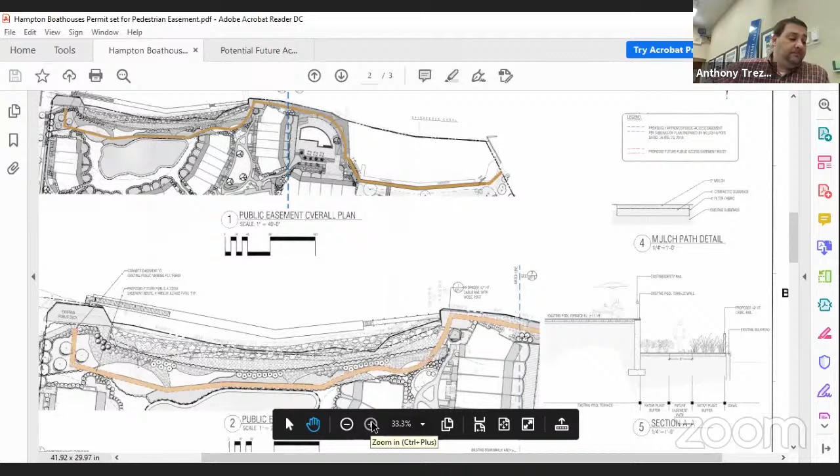Would he be willing, if John Zuccarelli is correct, and he knows that area very well and I respect his opinion there, if we wanted to change this, to stop it at that point and not get the MTA connection, just have it turn around and come back? Is that something that could be entertained?

That's not in the current plan. I know it's not, and Janice, correct me if I'm wrong, but I recall when we were discussing all this, you were aware that you could get approval from the county to go around the locks, using county property, since you had looked into that originally. So I think that's part of it. Probably the easier part, once you get MTA approval, is getting permission to go around the locks. That was the original concept, as I recall, going back a while.

Well, like Dennis said, the whole thing was we were losing a water-enhanced use of a restaurant. And the idea was that we're gaining this public access easement. Later on, it's an easement to nowhere, because we don't have the other adjoining properties signed on.

The town board allowed it to wait until those entities signed on. Getting those entities to sign on has proven quite difficult. But yes, we would like the easement now, later. We say it every time. We want the access easement, and we want the actual access constructed. Now we have a plan in front of us on how it would be constructed, if it could be constructed, and how much it would cost. So we'll know all this information, but whether or not it will ever be constructed is really up to other people not in this conversation, which is the MTA and the county.

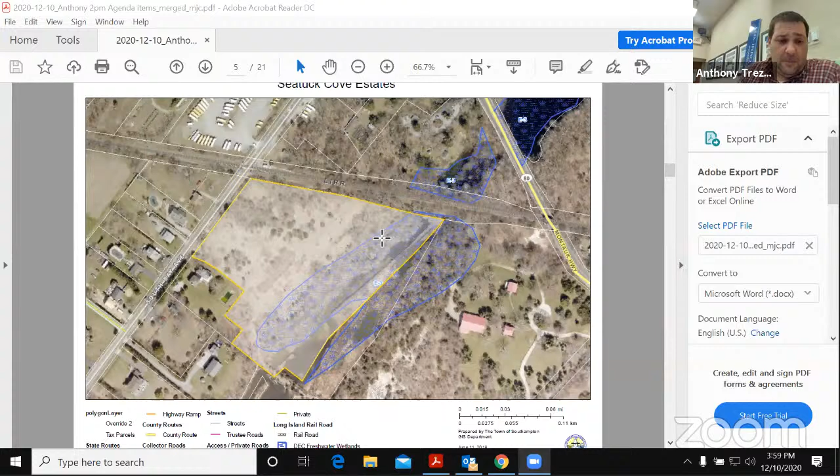The 4 lots will be up here, with open space covering all of the wetlands and wetlands buffers, with the 20-foot wide flag strip along the railroad track, and a walking path through the grasses. You can see the 4 lots here with the proposed nature trail that the applicant has agreed that they will install. So that's good, the open space will be dedicated to the town.

Just to show you a couple quick things before I go to the report. When we get to this section, you'll note this is the property where the applicant's going to apply the larger side yard setback, to keep the residents as far away from this property as possible. Also, I'm asking for, and you'll see it in the resolution, a split rail fence along the open space, including the flag strip. And largely a lot of the other issues have been addressed.

Okay, so we have the resolution here. The first part are the findings. The first one has health department approval, and I've noted the covenants and restrictions that they required. We have the standard plan that showed 4 lots. The third point was the SEQR determination to the negative declaration on March 12th of this year. The application is in substantial agreement with the adopted pre-application report from September 13th, 2018.

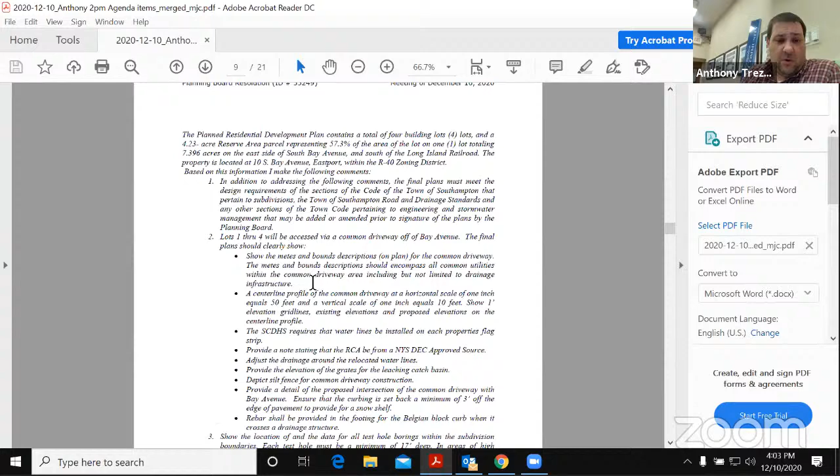The first whereas is basically all the engineering requirements, which I won't go through. They're the standard requirements.

Pertaining to the design of the common driveway, and the 3-inch rainfall. They note in the cover that the engineer says the property was part of a previous subdivision, where there was a conservation easement established along the wetlands, but that's going to be expanded now to include the entire parcel and all the wetlands, so there's no issues there.

We got comments from the Conservation Board, and everything's in order. We've addressed all their concerns, so that's good. Fire prevention just had the standard comments. There's no firefighting requirements beyond what's already out there.

The Trails Advisory, we had this discussion. The Trails Advisory wanted a trail to the bulkhead that we got. They preferred it on the other side of the property, but we went in a different direction, but still accomplished ultimately what we were trying to accomplish.

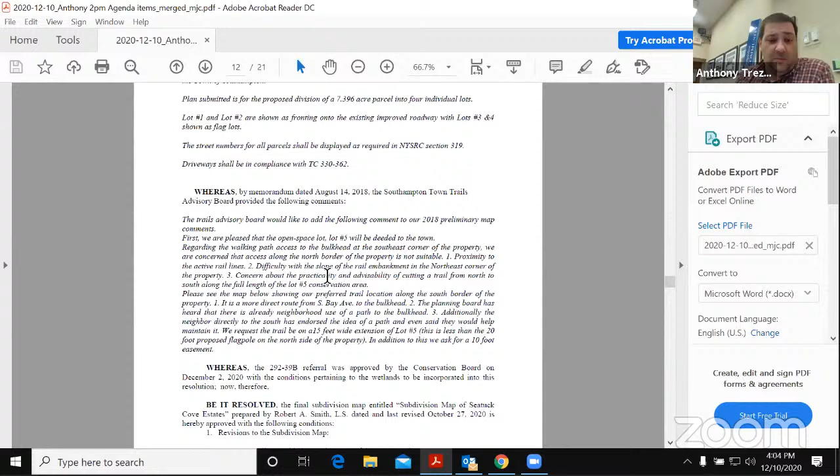The 292 referral was sent to the Conservation Board, and it was approved by that board on December 2nd. So I've incorporated all the conditions into this resolution.

So the resolution to approve the subdivision subject to the following: the revisions to the map, compliance with the engineer's requirements, removal of all proposed structures and building envelopes, final maps don't need them.

The 10-foot wide private access to the open space. I believe the map showed a 10-foot wide pedestrian access from the residential lots to the open space to the town, but they can't have that. They would have to utilize the public trails that everybody else has to. So that has to be removed.

Remove the word proposed from common driveway. A notation regarding the filing of declaration of covenants and restrictions, as well as a common driveway utility easement. A notation on the map regarding that the lots comply with the open space subdivision regulations.

The G regarding, they have a note on the map that talks about the R20 zoning, which is fine. It's a cluster plan, they could do that. But that's where I want them to also indicate that the side yard setback for lot 1 shall be 25 feet from the southwest property line and 20 feet from the northeast property line. That's shown on the map, so we'll put a note in there.

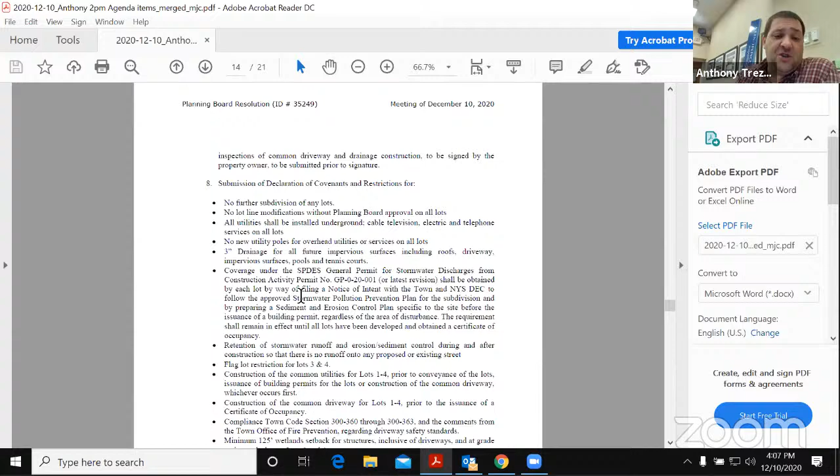The letter from the applicant acknowledging the subdivision regulations as it pertains to the common driveway inspection, covenants and restrictions that we'll require, all the standard ones: no further subdivision, no lot line changes, the installation of underground utilities, no new overhead utilities, the 3-inch rainfall, drainage for rainfall, the retention of stormwater on each of the properties, the flag lot restrictions for lots 3 and 4.

Actually, I'm going to fix the wording on that. We always use that - the flag lot restrictions for lots 3 and 4. That's just the provision of the town code that allows a property owner to determine the front yard on a flag strip. So we always put that in there so they know that.

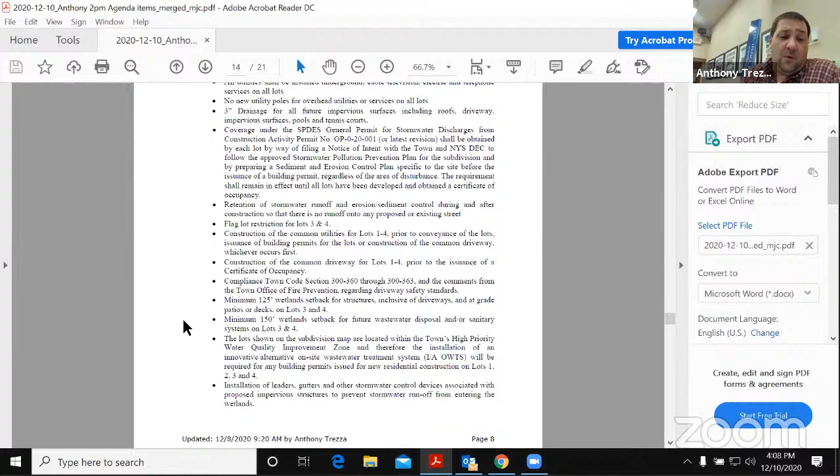The covenant relating to the construction of the common utilities prior to the issuance of building permits, and a common driveway for lots 1 through 4 prior to the issuance of the CO. Compliance with fire prevention requirements, and a 125 foot setback for structures for lots 3 and 4.

A 150 foot setback for the septic system for lots 3 and 4, and these setbacks are shown on the map. The property is located in a high priority water quality improvement zone, so septic system requirements, leaders and gutters need to be installed, along with project limiting fence requirements to protect the wetlands.

Notification of the Environment Division prior to construction. As the open space is to be dedicated to the town, removal of the encroaching chain link fence is required prior to dedication, which is shown on the map. Submission of a deed of dedication for the open space, a legal requirement submitted to the town board, and submission of the common driveway and utility easement.

Submission of the New York State DEC wetlands permit or a letter of non-jurisdiction for the subdivision. Individual wetlands permits for development of the lots will be at the applicant's discretion when they get building permits, but we need something as it relates to the subdivision. Then submission of all legal documents for approval, and submission of the final plans for signature. I don't know if the applicant is here and has any questions.

Anthony, I got a question. Sure, when is this trail going to be built? Jim is here. I mean, I was going to put it...

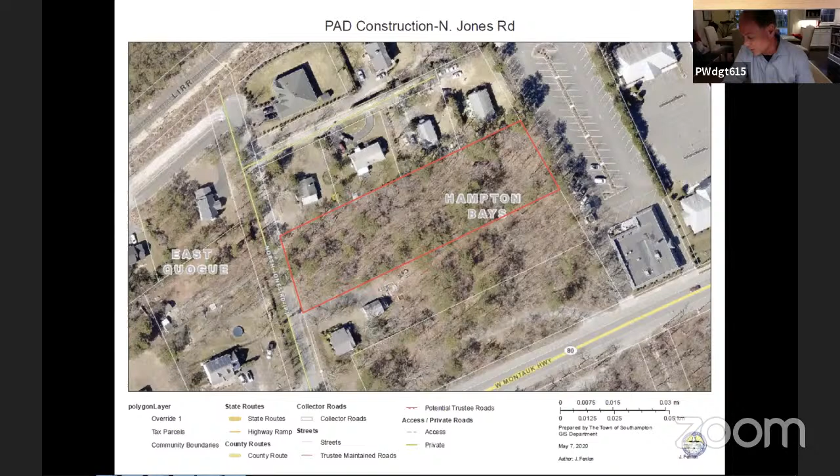And that's the concern I have with the eastern buffer. If we've got 60, the zoning already took out 10, now we're taking out another 15. So there's really just about 35 feet from the building envelope. The principal setback line is 60.

Yeah, I try to stick with the 25 because the 25 really does its job. It's up to the planning board if they would like to lessen it to 20 feet. I would think that 25 feet is a good compromise as it is. That's kind of our standard because it provides just enough to keep that natural habitat and provide screening.

Did you have any other issue? I don't. Any further conversation on this? So we'll go with 25 feet.

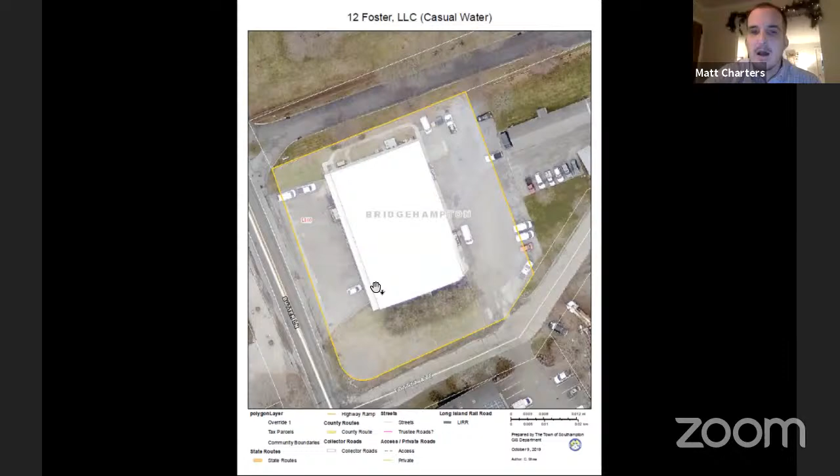We last discussed this back on August 13th. We went through the staff report as it was originally written, and made some recommendations based on the access to the property in the front, whether we should close that curb cut. This was the recommendation drawn up between myself and the assistant town engineer, to limit this. This is a 140-foot wide curb cut that exists along Butter Lane, and allow for a 37-foot central curb cut.

We've been waiting for plans for a number of months for this property, so we did get revised plans.

I did include some pictures in here just to remind the board of the condition of the building, and the parking that's occurring in the front.

This application is a site plan and special exception for a change of use from a beverage distributor to 2 special trade contractor uses. In 2014, there was a former application for a change from the beverage to 1 special trade contractor that was never finished. So now they're back to essentially legalize that change of use into 2 special trade contractors.

I do have some pictures of the back. Looks like a delivery coming in, and there are some bays in the back of the property. This is the revised plan we received. As you can see, the large curb cut remains. The applicant did remove the dumpster that was in the front, and corrected their drainage calculations. They also corrected the handicap parking spaces, but the issue of the curb cut remains.

I have some changes to the staff report I want to go through with you. These are updates, the first from the town engineer. This should say November - that's just the incorrect date. So these are the most updated comments. They're recommending the applicant provide a certification stating the capacity of each drainage structure on the site, and the widening of the curb cut for cross access in the back.

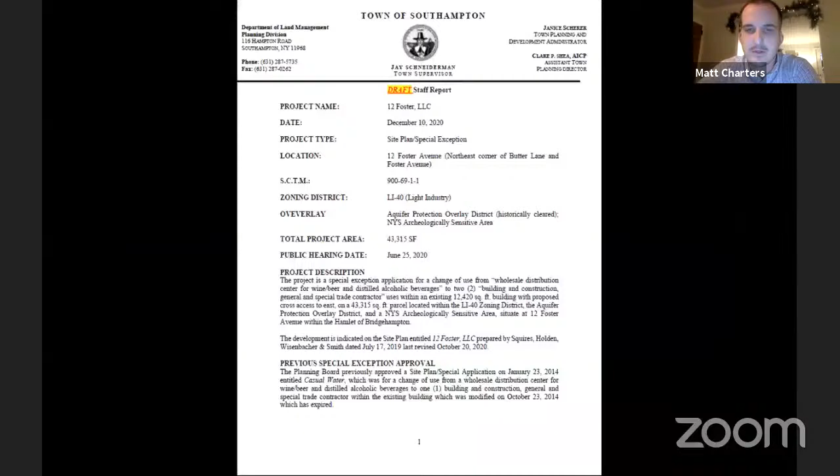Let me just get to the plan. Oops - oh, there it is. Let's just do this, this will be a little easier so you guys can see. As you can see, just - oh man, I lost it again. Sorry. Busy, the beauty of Zoom.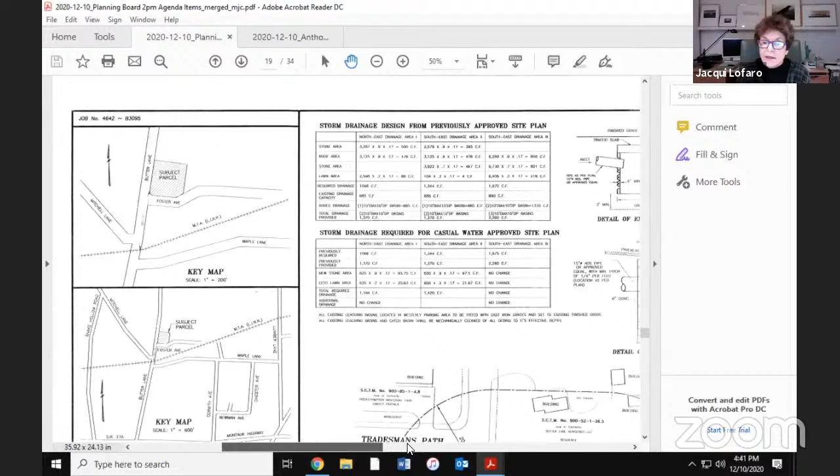But Dennis, just to add to what you're saying, we had originally wanted to close up more of that and then back down to just a single tree planting, not to get in any way of the loading docks.

Yeah, and I think that's a good opportunity to do that - Jacqui, I don't mean to interrupt you. If anyone's familiar with across the street, I'm not exactly sure what the use is. I can bring up a street view, but they have a similar setup in terms of the parking flush with the right of way. It goes from gravel to the road, but they do have trees that follow along the right of way. I don't know if those could be situated, one or two street trees.

I get it, but just to break up the facade of the building, just for some improvement. Right, I mean we had this situation on Maple around the corner, and when a couple of street trees went in to break up some of those curb cuts, it was an enormous improvement, both for traffic flow and for safety, particularly backing out into a very active road, a much more active road now.

Well, and what's going on in the next property - or for the truck delivery, they'd be actually driving into the road. They'd be backing into the loading dock, and then when they exit the site, they'd be driving right into the site. As opposed to, I don't believe any of that is going on there now.

No, but I drive by on a regular basis, planning for to see - the building has 4 large loading docks facing the street, and they've got 2 plus in the back. The whole building is a loading dock - well, the back is the loading dock.

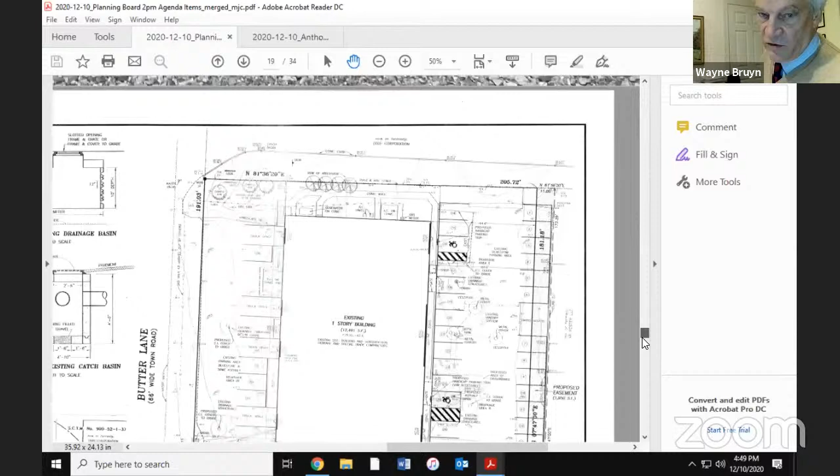The existing dumpster location was screened heavily by very large evergreen trees, which you can't see. More importantly, in 2014, the landscaping on the southeast line of the property is what Mr. Wesnowski objected to back then. He was fighting you strenuously, saying he saw no need to provide screening from other industrial uses to an industrial use. But nonetheless, here he is 6 or 7 years later, and he's acquiesced and is willing to do that.

So this plan incorporates everything that you approved in 2014 for cross access, shared parking, and everything else. But the plan was updated because the architect who prepared the last plan has left the state. So you have a better plan than what you approved in 2014 - the substance is identical to what you approved, but with better details as to striping and location of parking spaces.

As far as the westerly curb cut, my client will not accept closing that, because you cannot physically provide islands on our property and still maintain the proper width and safety for maneuverability of parking and truck maneuvering. And the idea of painting the building just because the board thinks it's looking old is not a rational basis - my client is not going to paint that building. It isn't that bad. And as you know, it's a metal building, so it's not as easily done as one could think.

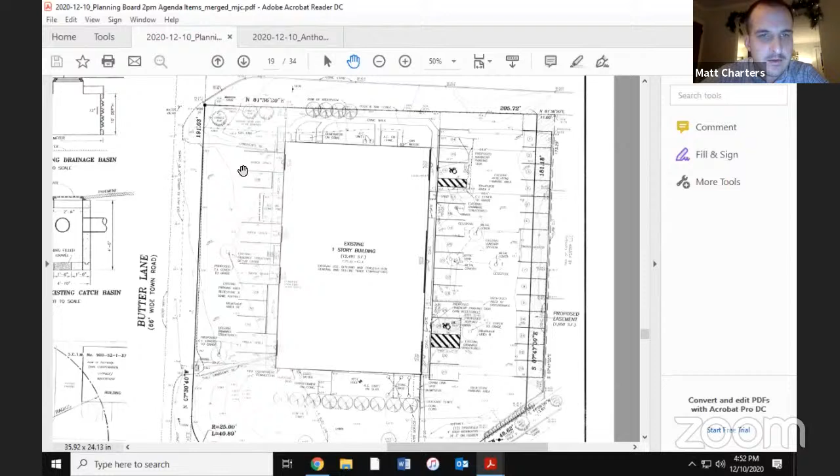Can you show the picture? Oh yeah, I'll show you the picture. Absolutely - it's only 4, aside from the 4 truck loading spots. So you would be eliminating all those vehicles except for 4 of them. You're getting rid of that dumpster and everything else, and you'd get that new striping as the plan is calling for. There's a washing machine in front of one of the garage bays. Yeah, all that can - it's a bit of a mess.

But supposedly we approved that in 2014, correct? Not the washing machine, not the dumpster - that was approved. There was a plan that was approved in 2014, but it never went to fruition. They never achieved a CO. So essentially now they have no approval for a special trade contractor - all they have approval for is the wine distributor and alcohol distributor use. So this is the board's opportunity to review it.

And I'm comfortable with what I'm recommending in terms of the access, but it's really the board's decision - my recommendations remain the same. And in terms of the dumpster that's on the south side, it's in the front yard. I don't know if it was missed last time, but I don't think it can remain there - there's a dumpster right here in the front. Yeah, which has been removed from the plan - that's no longer on the plan.

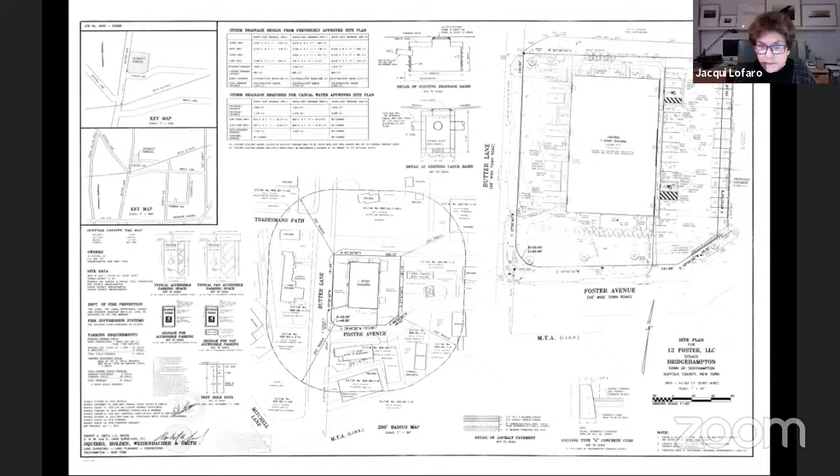Exactly where Matt had indicated, not the original plan, but I can show you. I have a street view of the property across the street, just to give you a similar idea of something that might be feasible to the applicant. Just give me one second.

Can everybody see that? I understand they have vines here, but they're street trees in the front. I know it's not exactly the same, but it's a possibility. Not a curb cut, though.

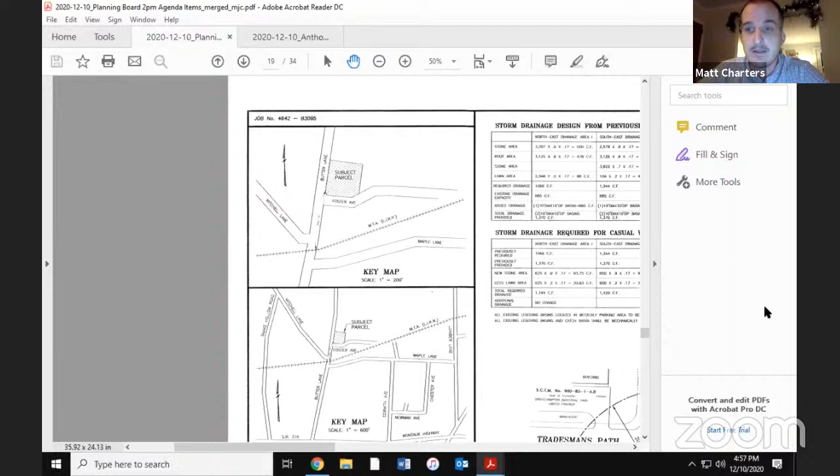To meet the proper aisle widths of 24 feet from the back of the parking spots, that gets you to the property line, so any curbing or islands would be out in the town right-of-way. They would need to be designed so they're largely on site, or have approval of the highway department, but they could be modified to not be the width drawn on the plan. I think something's achievable here, but like I said, it's really the board's decision.

The other thing to consider is they're not proposing any modification, this is a use application. I could see it differently if they were proposing to revamp the building, put in new doors on the north side, awnings or new bays, but this is a use application, unless I'm missing something. So I think the focus should be on landscaping, going forward with landscaping that would soften the visual impact of the building, especially that dead tree.

And cleaning up the parking in front, and cleaning up the washing machine area. The site plan gives the opportunity to do that and have the spaces striped so they're no longer haphazardly parking. Number one. Number two, they can't park in the truck loading spots.

So that means can we put only that four spaces in, the ones that can be? Can we put that in the conditions? That's what's shown on the plan. Absolutely, if you want to, that's what the plan is proposing.

And just for the record, the planning board approved — Matt, you want to go back to the planning board's approval in September of 2014, where they approved the current location of the dumpster area. Okay, that's fine, I'll look at it. That was a different board, different time. I mean, I can look at it.

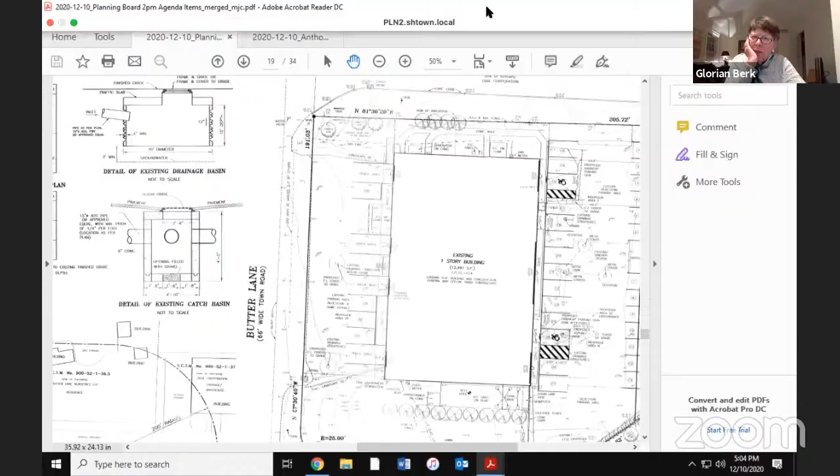Everything else looks good. Okay, do you need an extension? I'm sorry, I do. Next Thursday? That's fine, next Thursday. It's going to be a real quickie. We've chewed this application to death. It's done. Let's see a landscape plan.

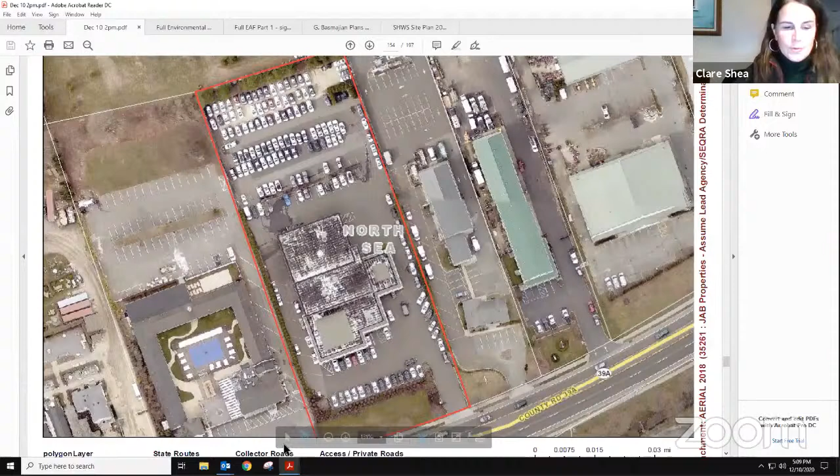You have asked for lead agency. So the first action would be to assume lead agency. And the second would be, if you want to right now, we can go through and look at the Part 2, which I did give to you. It has been amended a little bit. We can start to go through it really quick.

But they're also asking for a variance from the health department because they're going above the 600 and change GPD that they're allowed per day, to about 800 GPD. And in order to achieve that, they're going to ask for transfer of credits. I've also talked to them about possibly, at this stage, doing an IA system on the property, which would definitely get the nitrogen level down and be a good mitigation for it. So they've agreed to that in writing, and that will be part of the SEQRA determination if you make that today.

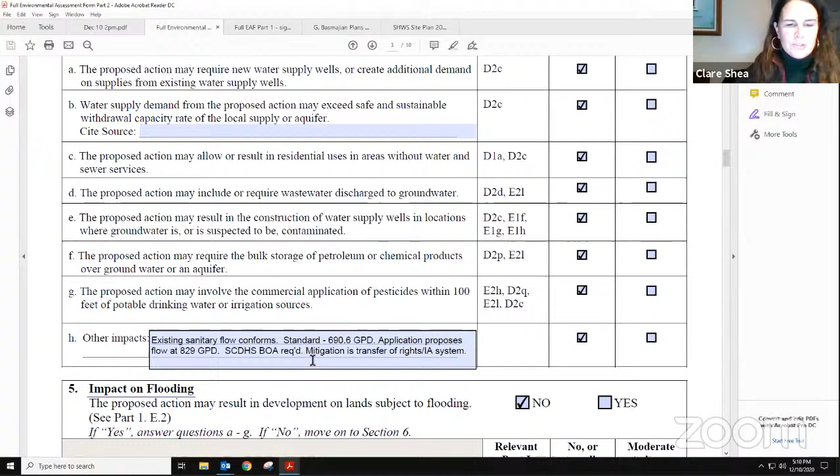So just briefly, impact on land is standard with drainage, surface water none, but groundwater is what I just spoke about, and I gave the numbers about the GPD, asking for the health department, and their mitigation is the transfer of development rights and the IA system. The other indications are non-aesthetic, that's fine. They had some signage shown on their plans, but they're going to take it off on the east and west side.

And then there's a critical environmental area, but this is related to the groundwater again, so I've put some language into that.

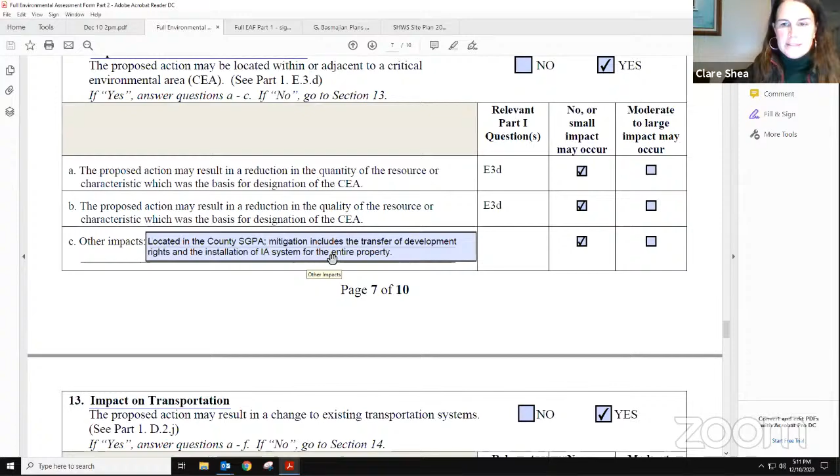This is transportation. I think at the end of the day, when you adopted your pre-submission report and reported to the ZBA, you realized this was really an enclosure of an existing space, except for that other addition. So I didn't think you had a problem with the transportation, so I'll put small to moderate here.

And related to that, with the community plans, it'd be small to moderate, and as long as they're conforming to their other standards on the property, I'll hit solid moderate. Do you have any questions? That was quick, I'm trying to help you. All right, if we go, we go.

So I'll put the language in, as I said, about the groundwater. There'll be that language in there.

There's no car washing, or any? There is a car wash, yes, and that's part of what they're asking the variance for. But they'll have to transfer the development rights into the property for the car wash. They have a car wash now. That's an impact on water. Yeah, so it can't not be. But it's an enclosed system, that's what they've said. So I'll put some language to that effect in there too.

Does anybody have any other questions about this? And you did say they were going to put the IA system in, even though, yes, correct? That'll be right in the SEQR determination, so that's with the health department's determination also.

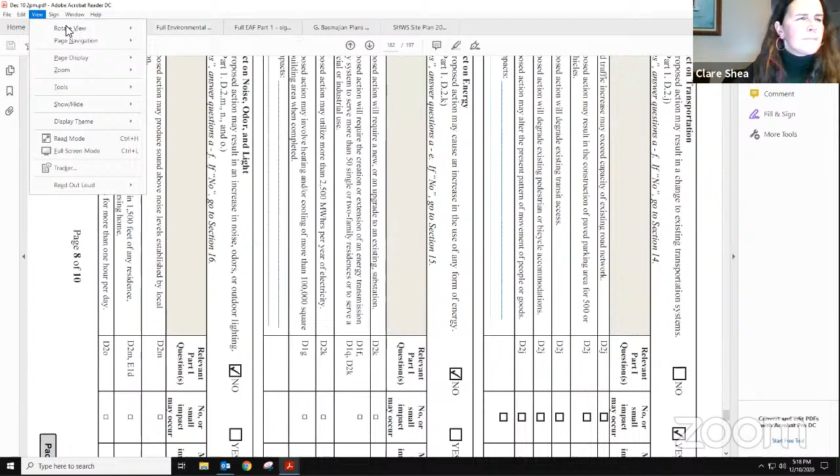This is, you've seen this several times, a pre-submission in favor. Your ZBA was in favor. The application's variances are minor. They're offering an IA system. In most cases, they're conforming to the zoning code. So I think you're prepared to issue a negative declaration and assume lead agency. This would be again for the ZBA, for the restaurant and the house on 2252, and the affordable apartments over the restaurant. Yes, 4 affordable apartments above here.

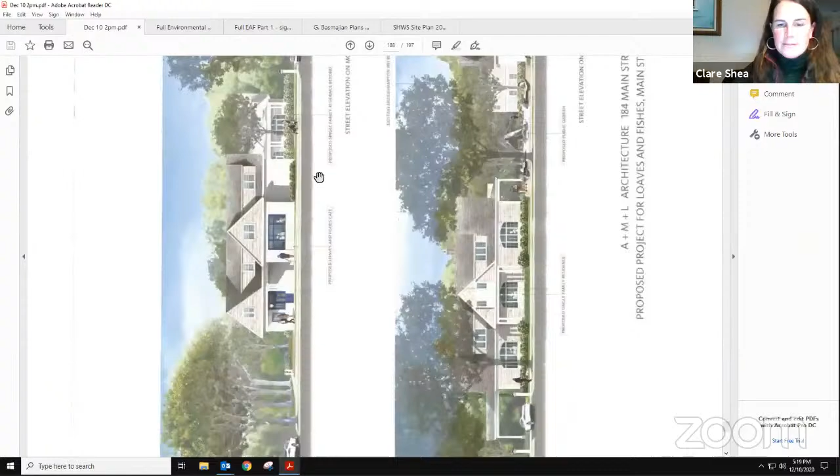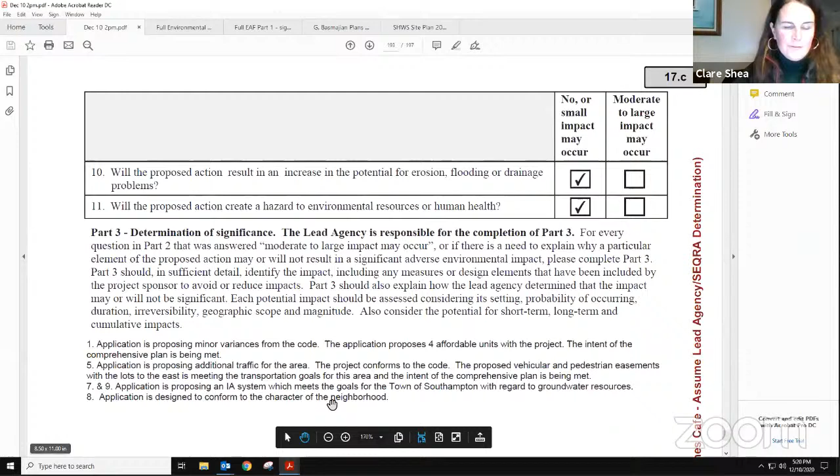So I've gone through the Part 2 and there are no large impacts. What are we linking with as far as the cross access to the east? Are we linking up with anyone? Oh yeah, the Bridgehampton Inn, so there will be a built easement with Bridgehampton Inn. Same applicant, same beneficial owners, yes. So I've spoken about the proposed minor variances for affordable units, the intent of the comprehensive plan met, additional traffic conforms to the code, vehicle and pedestrian easements for the lots to the east, meeting transportation goals in the area, the IA system, and conformance with the character of the neighborhood. So I'm recommending assuming lead agency and negative declaration.

One resolution? One resolution, okay, 2 resolves. I'll move it. Moved by Dennis, seconded by Gloria, all in favor? Aye. Opposed, abstentions? Is everyone here from the board except Robin? Yes, so it's 6 in favor, 1 absent. Thank you, Eric. Thank you guys, thank you Madam Chair.

So we just need some acknowledgement on the Mohawk, number 18, Mohawk Halsey's been signed. Yes, acknowledging that. And North Sea General Store, that has been signed? No, Jackie, I sent you an email today, that's going to be off. Oh, I missed it, okay, so just that one?

That's going to be, I have a resolution prepared, that'll be a 90-day extension. They're having trouble getting their plans. So we need a motion on North Sea General Store for a 90-day extension. Motion by Dennis, second by Gloria, all in favor? Aye, 6 in favor, 1 absent.

Okay, we are adjourned to tonight. Do we know, is Anthony here? What time, 6 o'clock? It's at 6 o'clock, yes. Kathleen, have people registered for the scoping? I do not have any registered speakers as of yet. Okay, all right, wanted to get a sense.